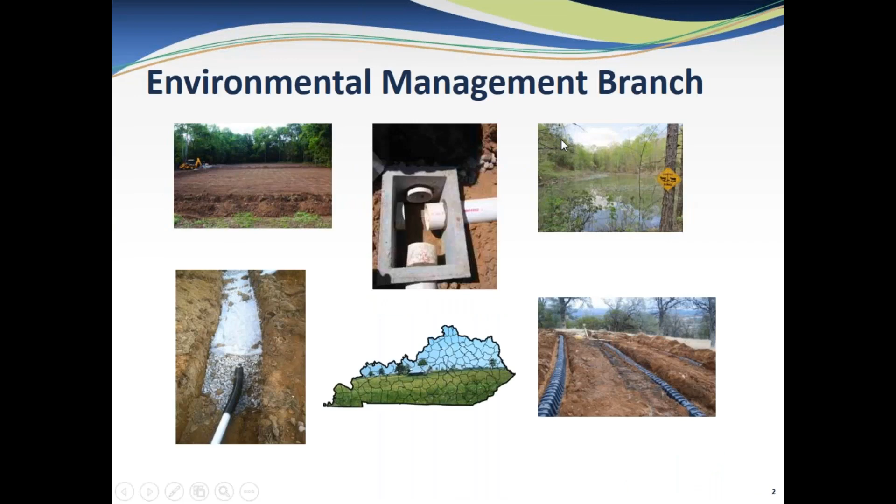I'm just going to go over some installer information. The present year started April 1st, 2018, and it'll end March 31st, 2019. Installers must receive their 6 CEUs by the end of March 31st, 2019 to remain certified. If they don't receive their training by then, they will become expired, effective April 1st, 2019.

For expired installers, they're expired for lack of maintenance training. They must obtain the 6 hours to get recertified, and then the 6 hours to get caught up for the year to be in good standing. Installers are never allowed to take the initial tests over again, and they're never deleted from the system unless they have passed away.

This is just the MOA, the updated, most recent one, and it just has the cabinet responsibilities and the health department responsibilities. And then our most recent installer certificate for the installer classes.

Our newest sign-in sheet also has my email address and my fax number as well. And these are the installer cards with the new commissioner, Dr. Howard. It'll have their name, their certificate or certification number, the expiration date, and the health department they're certified through. On the back of the cards, they have the number as well.

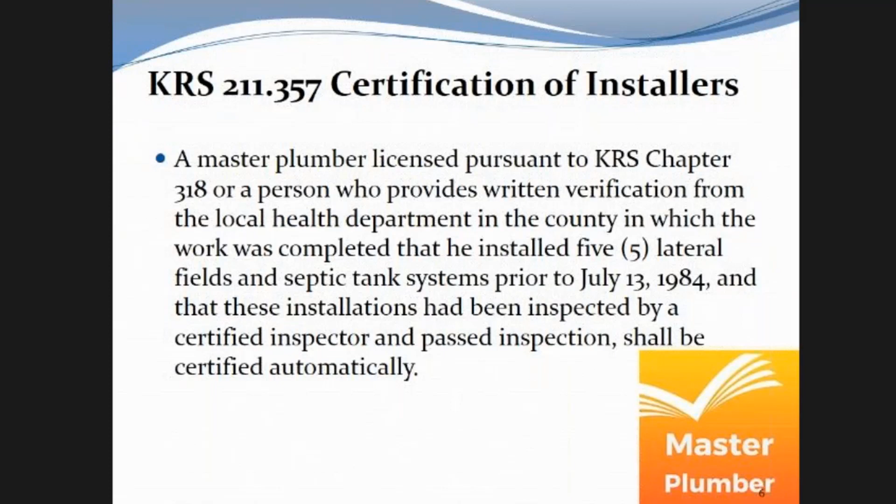The one good thing is once they are certified, they do have to do the annual training, so they're going to get training. I know it's after the fact, but the law says they don't have to take the test to become the installer. We can't change that—somebody would have to lobby a legislator to change that. Kenny, you'd probably be a good one to do that. No, I'm too old. Okay.

Let's see, I'm not sure, 5 systems. Yeah, once the cabinet's made aware of their 5 completed systems, then they get their full certification within 60 days. Again, the cabinet has to know that they've done it—nobody's a mind reader.

Violations—some of your installers, especially your newer ones, need to be aware of these violations that could trigger administrative action on them. This isn't being presented to threaten them in any way, we just want them to know these things can happen, and some of them are a 'shall happen,' not a 'could happen.' This is a may revoke or suspend.

Well, that's not helpful. If they violate the provisions of the chapter or the regs, that's any of them. If they practice fraud or deception to become a certified installer. If they're just plain incompetent to install an on-site sewage system. I don't know how you would define that, but I guess you know it when you see it.

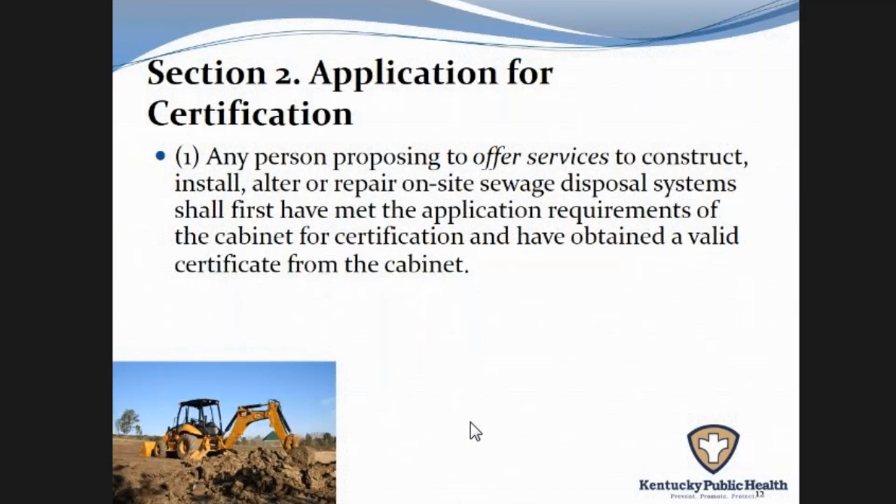So the application for the certification—if they want to become the installer, they have to fill out the application. Even the certified plumbers need to fill out the application. It gives the information as far as the DFS form 233, and the definitions of the different levels as they currently are. Again, this is from KRS.

Going over what the expectations are for that minimal, for the probationary level or minimal knowledge. This is an important one—I don't know if it's applied equally across the state, but hopefully as you all get applicants, each year when they get their certification, they have to show proof of liability insurance.

This is important that your installers are aware of this—they need to carry that, they have to maintain it each year, and provide the proof to the health departments when they're renewed each year, and that it's required for all installers. This would also be required once a certified plumber becomes an installer—they would have to show proof of liability insurance.

Then the full level of certification—again, this is after they've completed their 5 systems, been approved without any problems. Certification is not transferable; it's only valid for the individual person.

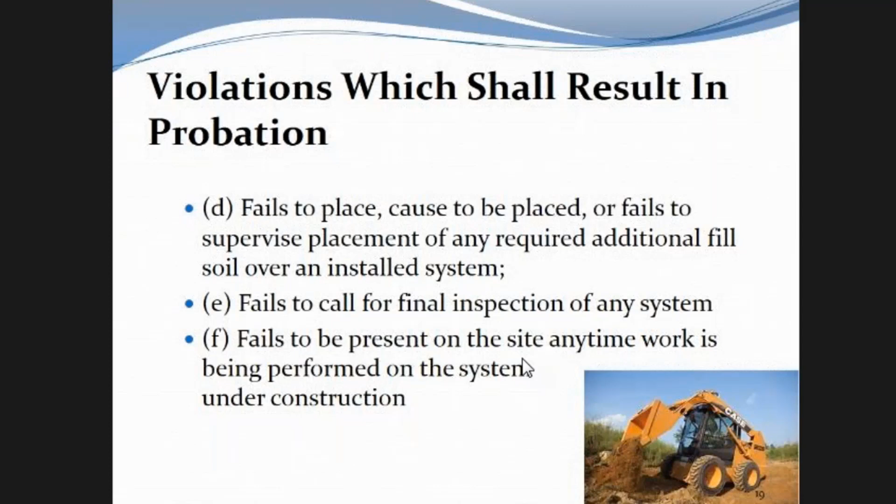So it's important they realize these possible penalties. Hopefully that would prevent this from ever happening.

Who can assign the probation? It can be assigned to a certified installer by the cabinet or the certified inspector having local jurisdiction, of course.

It's important whenever probation is issued on an installer that any stipulations as part of that probation are put in writing, so it's all very clear. There's nothing that's going to happen later that wasn't expected.

And the health department can put stipulations on the probation. It's not just you're on probation for this amount of time—you can add stipulations.

For other violations, the normal procedure would go into place as far as suspension, revocation, and just again, for your information, before those type of proceedings happen, you should have an in-house sit down with the installer and document what was discussed and what decision was agreed upon, if one could be agreed upon, before actually going down the road of doing a real conference.

You need to have an in-house meeting. You want to try and resolve it locally as best as possible.

Whenever you do any type of administrative action, probation or otherwise, the installer has the right to request an administrative hearing. So whenever you issue the notice of probation, so on and so forth, you need to give them the request for hearing at that time, so if they want to dispute it, they know how to go about that.

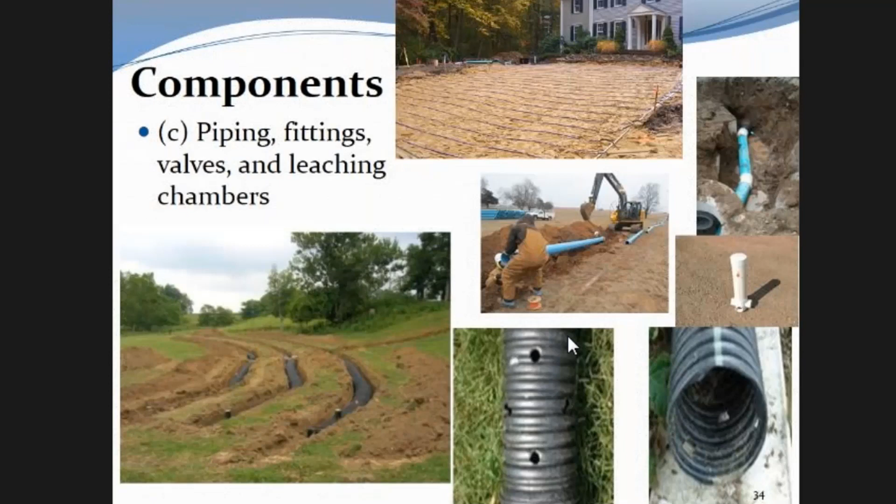And instead of doing the Jeopardy this year, I'm sure all of y'all will miss that. This will be the next fun thing for your installers to jump into.

Distribution with varying length laterals. What type of distribution can you use varying length laterals with? Hopefully your installers will know this.

Installer must maintain to pull a permit.

There you go. This ain't gonna be done all at once. This will pop up throughout the presentation, so a little respite for your installers. Depending on how much time you spent with your installers, you can take a break with them. We're not doing that today, of course.

Pipings, fittings, and connectors—again, this is still talking about your components, your non-perforated pipe, gravity flow usage. This is going to basically talk about what is allowed, what type of non-perforated pipe they're allowed to use. If you've had issues with installers bringing in some of the thin-walled flexible pipe, this is a good time to talk to them about it.

Just go over how just because somebody at Lowe's says, yeah, I'll sell you this, that doesn't mean they can use it. I know that's happened in the past. It talks about the different SDRs and ASTM qualifications for the pipe.

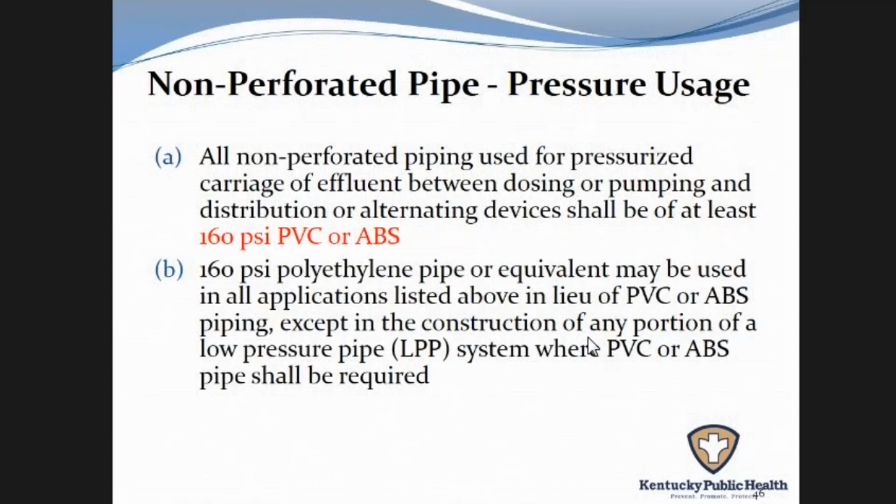So what type of pipe and when to use it? Your installers might chime in on other ideas they have about different types of stronger pipe that work better in certain situations, such as going under a driveway, to carry effluent from the tank to the D-box. You might remind them if they're doing gravel beds or laterals that the solid pipe needs to go in about 2 feet into the rock lateral before starting the perforated pipe, to get that effluent into the lateral line. This is a good time to talk to them about that.

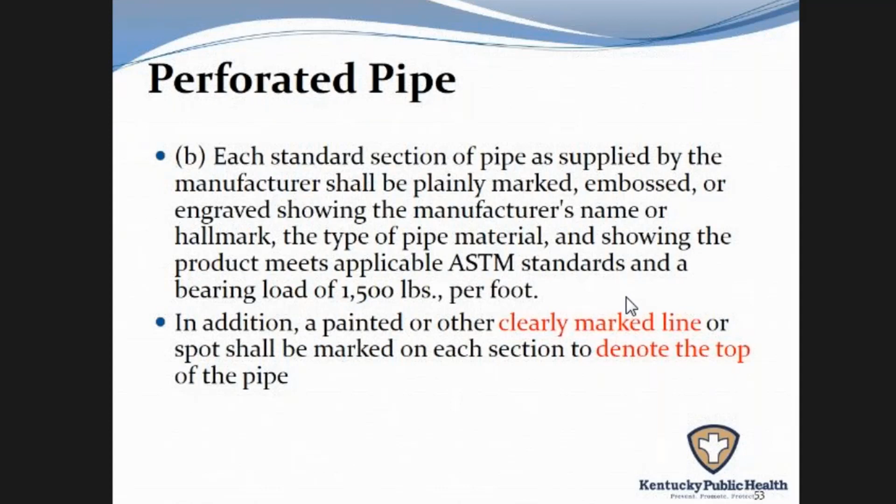And the super crush - you can go over the perforated pipe with them. Of course it's a different quality of pipe, not as thick or as rigid. Talking about how it has to be marked, and it has to have the line on the perforated pipe so everybody knows which way to turn it, so the holes are in the right direction.

They can actually use, for perforated pipe, a minimum diameter of 2 inches. I've never seen it done, but they can. It's 4 inches for 25-plus years - it's 4 inches, but the reg says it can be a minimum of 2.

And then it gives the standard for hole placement for 2 and 3 inch diameter perforated pipe - same sizing, same system sizing. The lateral line sizing would still be the same for gravity use in a rock system, just instead of 4-inch perforated pipe you could have 2 or 3 inch.

I've never seen it used - it's not common on the market, but here are the regs if somebody needed to know. This lets them know the minimum hole size and how the holes will be placed on that smaller diameter pipe. If you ever see that type of pipe and you're not sure, you can always call one of us, call the Frankfort office, or look in the regs.

And then the 4-inch pipe, which I think is what we're all used to. Do you think that maybe that's referring to a low pressure system or something like that? It could, but this is gravity usage. Yeah, the pressure usage, even in the lines, is a stronger pipe.

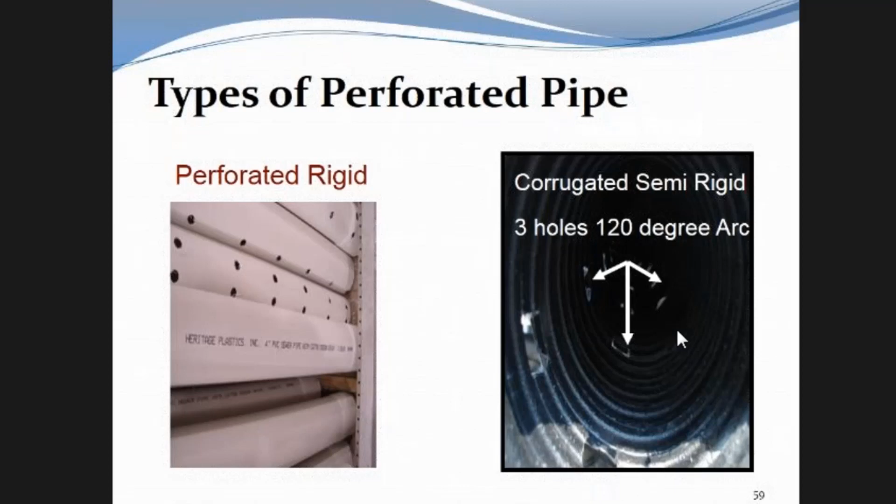So some items that were the components in the on-site regs themselves, some things that affect installers. Hopefully y'all aren't having too many issues with this, but one of the big ones that we still see in areas is the system drawing to get a permit. So you can talk to them about that. The permit's only supposed to be issued to a certified installer. They're not supposed to be sending in homeowners and whoever else. It's supposed to be the certified installer. Damaged tanks will be talked about, the risers we talked about, system inspection requirements we talked about, the installer's affidavit, and the cover soil.

So these are things that are going into here. If there's other items in the regs that you need to talk to your installers about, obviously this is your chance to do it while you're having your class. You don't have to only talk about these if there's something else you need to discuss with your installers.

So the proposed system drawing, this talks about why it's required and what is required. That last bullet is pretty straightforward. Application for a permit to install, when it's submitted, it has to be accompanied by a detailed drawing of the proposed system or alteration, including all necessary specs and the required permit fees. So if your installers want to kick back on that, you can show them this is the regulations, and this is why you're required and held to that standard.

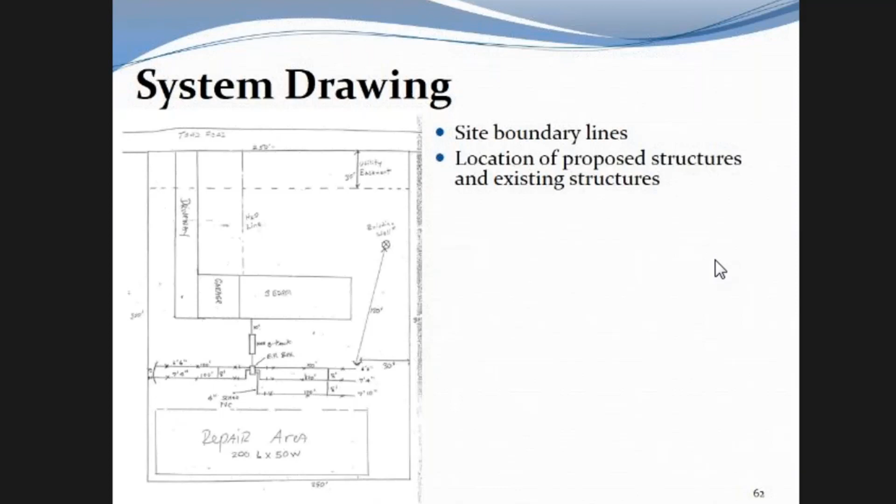It's a good time to work with your installers on that. Site boundary lines are to be shown, location of proposed structures, existing structures, the location of any items on the property that require setbacks, and of course the sewage disposal system, zoomed in tight. Grade shots of all the components, size of the septic tank, type of D-box, type of laterals, and the footage - length and width of your lateral lines, and the setback distances.

Permit is to be issued only to the installer. Again, this is by regulation, 902 KAR 10:110. Or a homeowner, as provided, and it expires one year after the date of issuance. Unless you can always grant an extension if it's warranted.

Component installation standards. Again, if y'all are having issues within your area and you need to talk to your installers about how they're getting their permits, what they're submitting for their permits, definitely it's time to do it. Septic tanks, other pre-treatment units, dosing tanks, holding tanks - they are to be installed level. The connections are to be watertight. The manufacturer instructions are to be followed, especially for the electrical connections.

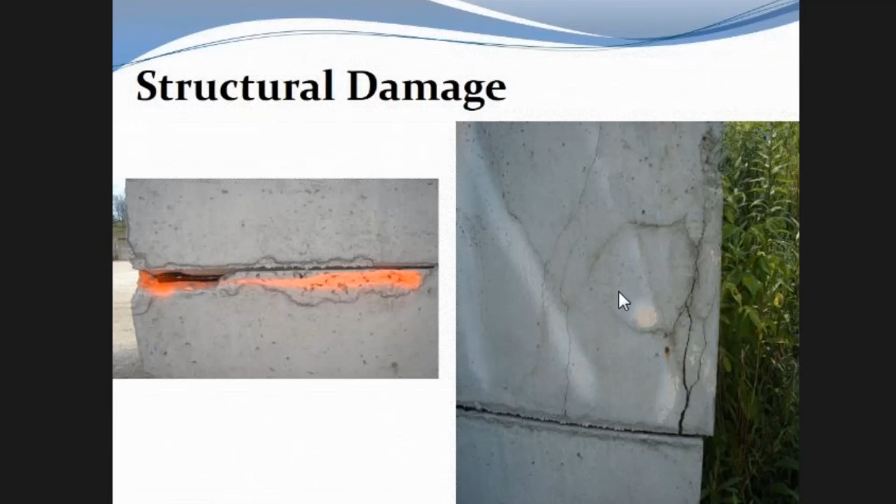Risers, hopefully all your installers have gotten used to having to do the risers. One thing to reiterate to them is the septic tank manhole lid has to be in place, and then the riser lid — it's a two lid requirement with the risers. The riser lid has to be tamper resistant. Lids or covers, precast concrete, cast iron, steel have to be 60 pounds or more and require vertical lift. They can't be a slide-off type of lid on a concrete riser — it has to have the lip, it has to be lifted vertically.

If you all see problems with components, you can talk to your installers about that, and any problems you see with components, get hold of one of us so we can go work with the manufacturers to hopefully get them corrected. And if installers are having continuous problems with the manufacturer, they can let you know, and then you can work with us, and we'll get out there and work with the manufacturers.

Lids or covers made of sheet metal, plastic, or fiberglass have to be attached by bolts or other suitable fasteners.

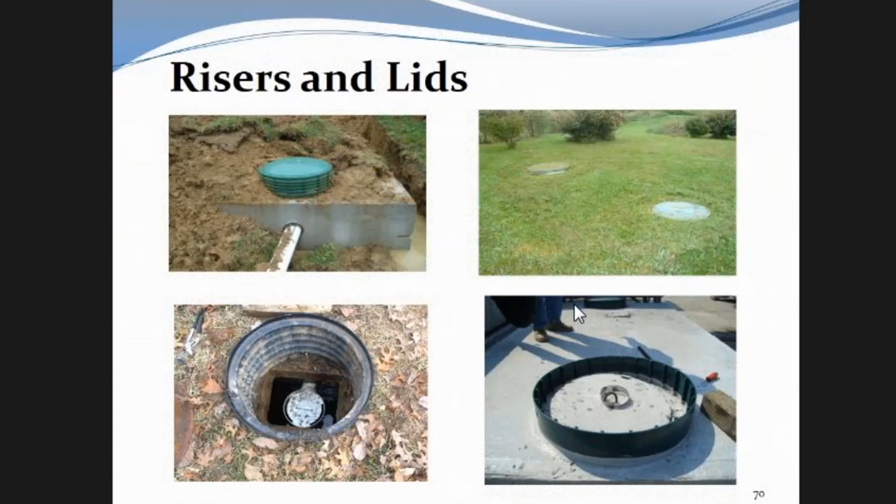This is talking about the installer's affidavit. The installers are required to submit an installer's affidavit for every system when you go out there to do the inspection. And on that, they have to record all their grade shots for their excavation work. Basically, they're checking their work before you get there to check their work. They're supposed to shoot their grades before they put in the chambers, the rock, et cetera.

Do they have to shoot the repair area? Is that required? No, no, this is for the excavation itself. So in the repair area, there's no excavating being done yet. This is when they come in to pull the permit. Would they have to lay out a system, lay out the repair area?

It's not required by our regs, no. If you are in an area, you all, Northern Kentucky Independent, Fayette County Independent, Jefferson County Independent, you all can make requirements more stringent than our regs, but no less stringent. So if y'all are requiring that, that's your all's requirement. And if that is one of your all's requirements, obviously class is a great time to point that out. That's up to you all. If you're in Fayette, Jefferson, or Northern Kentucky, and you do make more stringent requirements, you're supposed to have it approved by your board and put in writing. So just be careful how you do that, that way you don't get in trouble potentially for going cowboy on people.

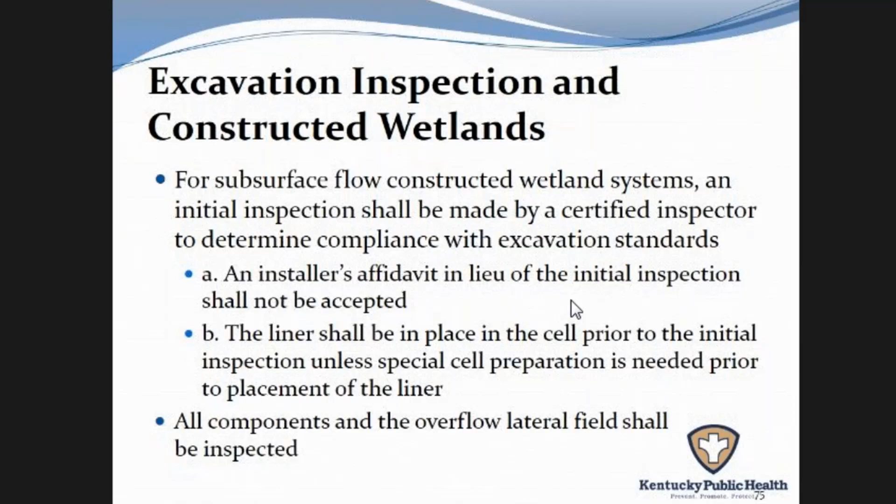Now the overflow lateral lines for the wetland cell - they could do an installer's affidavit, or you could go ahead and do the excavation inspection while you're out there doing the wetland cell, however you want to work that.

The top half of the inspection form is the excavation inspection, and noted on the right side of that, to be performed on all constructed wetland systems. And these are actually required on homeowner installations - the thing that we all love, homeowner installations. You got to hold their hand the whole way through, which includes doing an excavation inspection, not an installer's affidavit, for a homeowner.

Not that the installers really need that info, but it's good to know. Hey Craig - yep, it's an odd thing. We don't really allow homeowners to do their own systems unless they take the test, whatever. But I had a guy who was a master plumber.

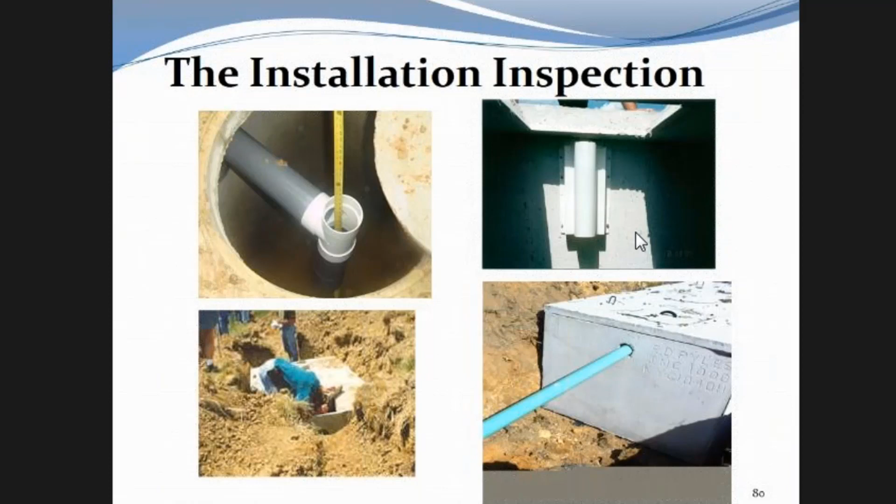The water leveling - hopefully you're not having any problems with installers. They are to provide the water, even if they're not there, they're supposed to provide you water, leaving you a 5-gallon bucket, whatever, but they're supposed to provide that for you. Testing of the dosing devices, low pressure systems and alarms. Shooting of trench bed, constructed wetland cell, lagoon bottom, examine the installation of all your lateral lines, perform other necessary examinations. Whatever issues you might be having with installers, or things you want to reinforce with them for your inspections, this is a good time to do it, so everybody's on the same page when you show up to do your inspections.

Showing some photos of some basic processes that take place. Top left showing grade shots being done through a port going down to the bottom of the trench. The chambers - you can shoot them either on the top of the chamber or alongside the chamber since they're consistently the same height.

Lagoon fencing - some areas don't hardly have any lagoons, other areas have a lot of lagoons, so it depends on your area how much you'll need to address this. The fencing is the installer's responsibility. You can reiterate to them, even if they have some agreement with the homeowner, it all comes back to the installer, whoever holds the permit. If something's wrong with that fence, it's coming back to them as far as your inspection goes. You can talk to them about the type of fencing that's allowed, the height, and so forth.

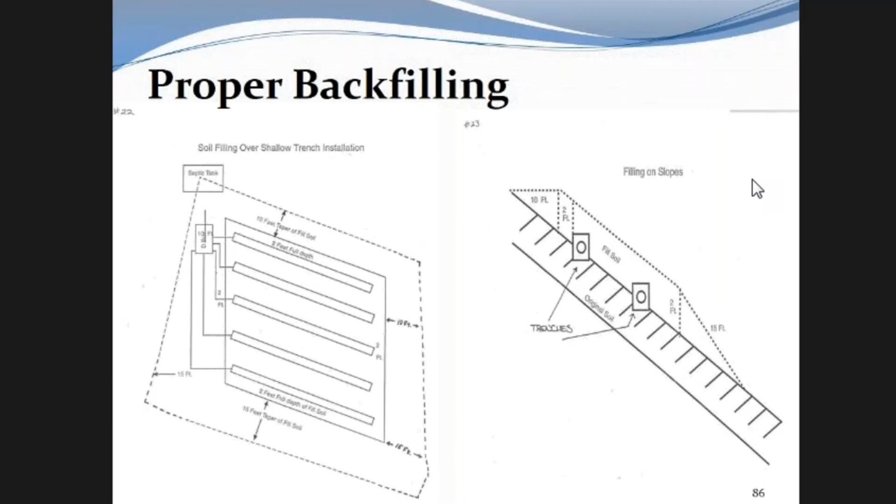Here's a new drawing - not really, it's about 25 plus years old - just showing how the cover soil needs to be placed over and around, then tapered out upslope off the ends and downslope. If your installers haven't seen this before, then they must be brand new. This can be an issue when an installer subcontracts out the backfilling or placing cover soil over a system, and deals with homeowners for adding the cover soil. Again, the installer is ultimately responsible. Inspectors aren't to give final approval until all the cover soil issues are completed.

Some prohibited practices from 10085: cutting, filling, or otherwise altering the original grade. Basically the area where the system is supposed to go, they're not supposed to go in there and mess with it. Or if they get there and it's obviously been cut - maybe a builder has come in there and changed things around - then the installer should stop and call you, the inspector, before putting the system in. That has happened in a big way in some areas in the past. Hopefully you can have a good working relationship with your installers, but let them know that if they see something that looks out of the ordinary, they need to stop and call you.

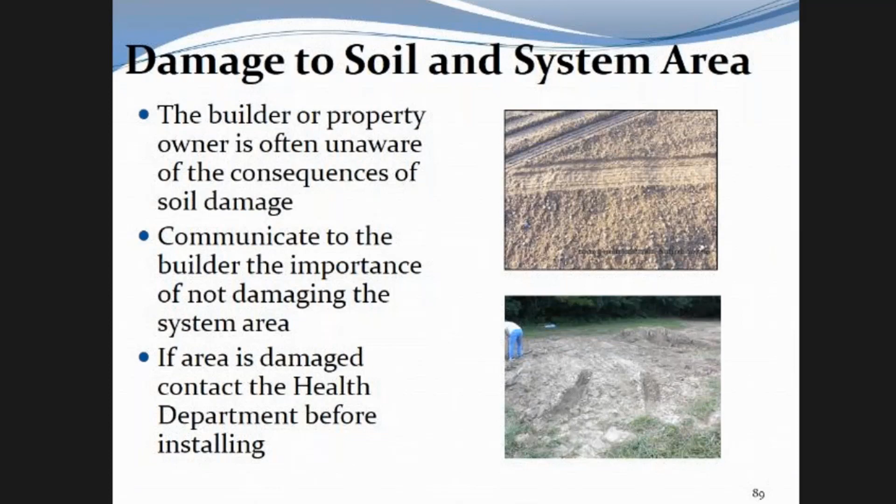That's just showing some examples, an area driven over at top right, and just showing different stockpiling of materials around a construction area.

Contracts, of course, this is not in regs. This is merely information to share with installers. The use of contracts can be a benefit as far as clearly defining what's expected of an installer and from the homeowner's point of view, and hopefully help them stay out of problems with unhappy homeowners. It goes through some of the benefits. You can talk to them about that.

Benefits to the homeowner, it's a two-way street. Contracts can protect both parties if they're used. I don't know what it's like in your all's area, but it seems like wherever I go, I never see a contract in place. It's just people mad at each other because they said they didn't do this, they said they'd do that. I'm sure installers have been in those situations. If they get a written contract with the homeowner, it could keep a lot of problems from ever happening. Or at least they'd have something to fall back on and not just verbal stuff.

Hopefully, as installers move forward with modern times, maybe they'll actually start using contracts. Everybody else does when they do work, it seems like.

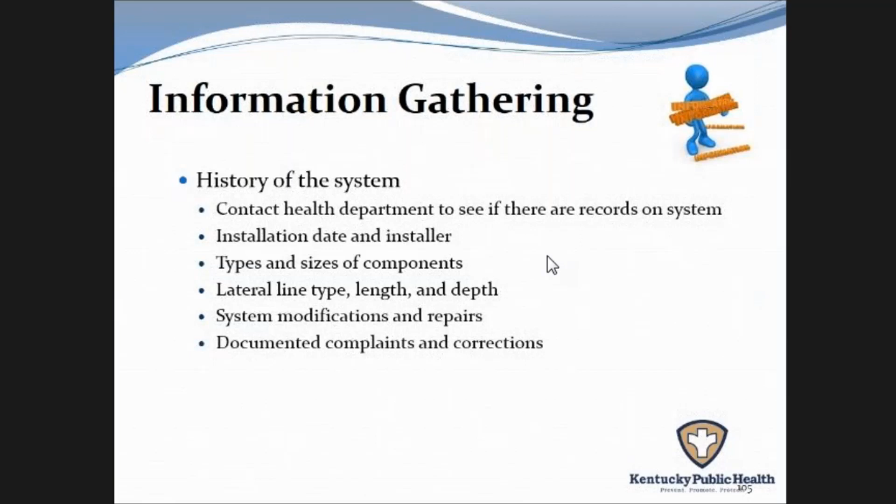That last bullet, documented complaints and corrections, it doesn't even have to be documented. If the property owner or a neighbor can provide information on how long a problem's been occurring, that can be helpful.

Routine servicing records, if they've ever had their tank pumped out. The water usage, that can be one of the first things to get, if possible, either through the property owner or if you have a good working relationship with your water companies, if they can provide the last year's water use.

A lot of times when troubleshooting systems, it's not necessarily about pinpointing the problem. It's as much about eliminating things that might be the problem. So if you get the water use, it can help you eliminate that as being one of the potential problems.

The waste composition, what's going into that system, make sure they aren't putting their air conditioning condensation drip line or their water softener, so on and so forth, their downspouts. How many occupants are there, which goes into water usage.

Any other property owner information as far as the malfunction or damage, how long has it been happening, where is it happening, is it all the time, is it just part of the year, so on and so forth. Talk to them about the whole process of a system over time having problems, filling up.

The septic tank, they're going to have to find it if it can't be found, although with the risers anymore, that helps. Property owner or installer can uncover the inlet and outlet manholes. Any work being done around the system should be done by an installer or homeowner. It's not recommended that inspectors do it.

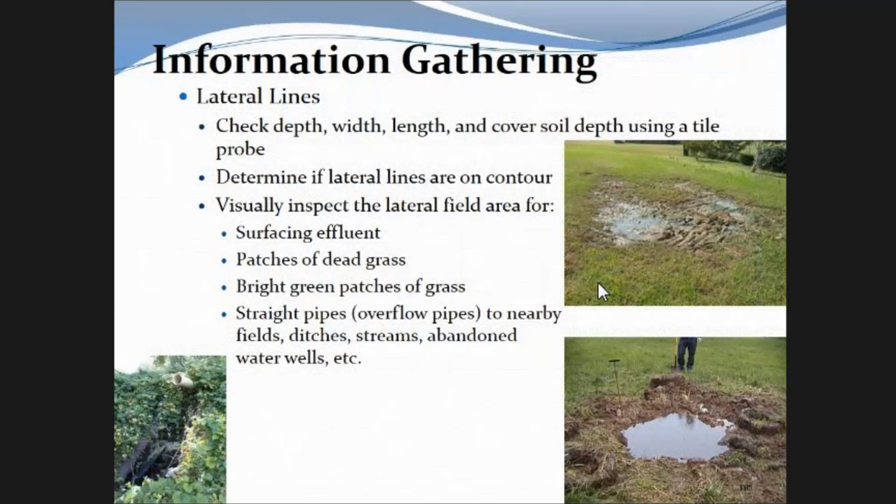Another thing an inspector can do with the installers, once you locate the lateral lines and see what depth they're at, you could drop a few auger holes in between the laterals, not near the laterals—you don't want to create a gusher—and see what the soil conditions are where those lines are. If it's an old system, they might be down deep in some bad soil.

Lateral lines, rock laterals: probe into the rock to see if lines are saturated or dry. On some old systems, I've seen homeowners convinced they need a new system go out and probe. You find a few lines that are bone dry and come to find out it was a disconnected or broken pipe further back in the system, and they don't need a new system.

May need to probe throughout the length of the individual lateral lines, to see if water's even getting out to the far reaches of the lateral lines.

Leaching chambers, might have to try and probe next to the chambers to see if the lines are wet or dry. Of course it's harder with chambers as far as probing to see if they're taking water, since you can't probe right down into them like you can a rock system. You can try and probe next to them. If an installer is going to be there to work with you, they might very carefully dig right next to a chamber, but of course that has to be done very carefully.

What's that top picture showing? Top right, a bunch of gunk coming out of a leaching chamber. I'd say somebody put a whole lot of something through the tank that should never have been there. Or there was no baffle. Who knows? That's just a mess right there.

Is there some good information being shared back there? We need it. Okay.

That's just a mess, what that is. That is nasty. It looks like everything in the tank came out to that line.

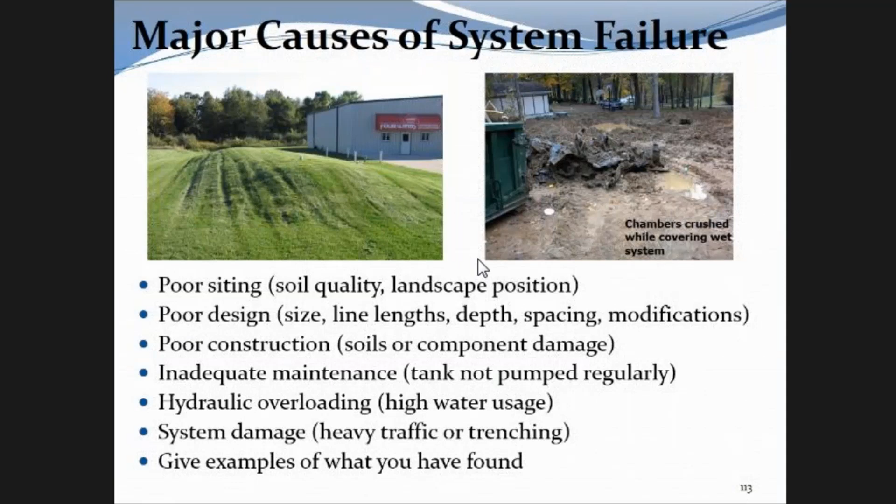Types of failures: there's above ground, and the one we pretty much never really know about, below ground. Not sure if that's a failure or not if it's below ground, unless it comes out somewhere, and then you're going to have to do a dye trace to really determine if it's a true failure or not.

An occasional failure is usually related to wet weather or variable water usage. A continuous failure is always there. So if effluent is surfacing, you can have a single point line surfacing, and here's some of the reasons it might be doing that: uneven distribution.

That's not overly unusual, especially within a few years of a system going in, through frost heave or whatever. An equal flow box can get thrown off. Speed levelers pop off for whatever reason - go back in and readjust them. Trenches not being level can be a problem, hopefully caught between the installer's affidavit or excavation inspection and the final inspection. But if that is the case, it might end up needing a new trench and abandoning the old trench.

If the system is full, effluent ends up surfacing at the lowest line in a hillside system, or in an equal flow system at the line with the least amount of cover soil or the least permeable line, or it might pop up all over the place. In equal flow systems, just putting soil over a wet spot isn't necessarily going to fix the system - that's going to have a problem if it's already full. A lot of time that's like playing whack-a-mole - it's just going to pop up somewhere else, and you're just chasing it around, slapping Band-Aids on a cut artery.

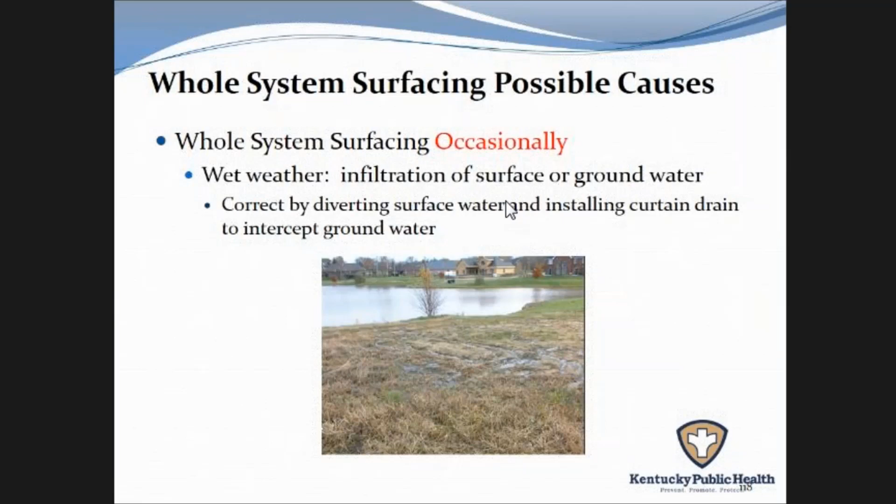The whole system surfacing occasionally would be due to wet weather, infiltration of surface or groundwater, and this is where diverting water, either on the surface or through a curtain drain, can help a lot. During dry weather, if you have intermittent excessive water usage, then they need to go in and check their plumbing, limit their laundry use.

Excessive water usage daily, they're going to have to make a decision. They're going to have to decrease their water or increase the system size. There's only so much you can do. If there's an inaccurate soil evaluation, have it reevaluated, put in a new system, or add on to the existing system.

Improper installation of system, lack of proper maintenance, system size was inadequate. That might fall into one of these categories where somebody applied for a 3-bedroom system, but they actually put in a 5-bedroom home, and all the bedrooms are being occupied, which you probably see that through water usage anyway, in which case the system size was inadequate from the get-go.

Again, the installers can give you a lot of backstory information when they start talking about this stuff.

Might have damaged components, tank outlet baffle or tee. That middle bullet, infiltration of spring water, I know that gets talked about in a lot of places, but I'll be honest, it seems like that's very rarely ever truly what's causing the system to fail, but it is possible. It's a unicorn. Yeah, it's kind of the unicorn of failing system problems.

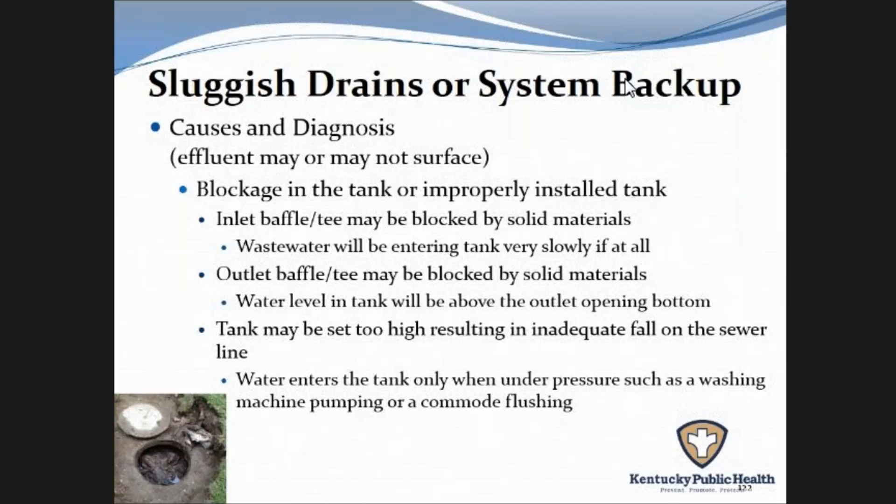You can go through each of these items and talk to them with your installer. That last bullet, it happens.

The tank can be installed backwards without realizing it. Some of these manufacturers, unfortunately, in today's world, can't hire the best quality of helpers. Sometimes the number, the code, if it's painted on, gets painted on the wrong end of the tank. It's painted on the inlet end. And the tank gets delivered. Whoever delivered the tank assumes the number's on the outlet end. They set the tank, and the tank's now backwards. So it does happen.

Well, it's easily fixed. It was a two-piece tank, so we only had a half of it to reseal it. Okay.

Again, blockage or damage, sewer line pipe. Your installers, they can talk more about this. Some of them I know are using the little cameras to go run through the lines. They can check for blockage doing that. But anyway, you can talk to them about the sluggish drain issues.

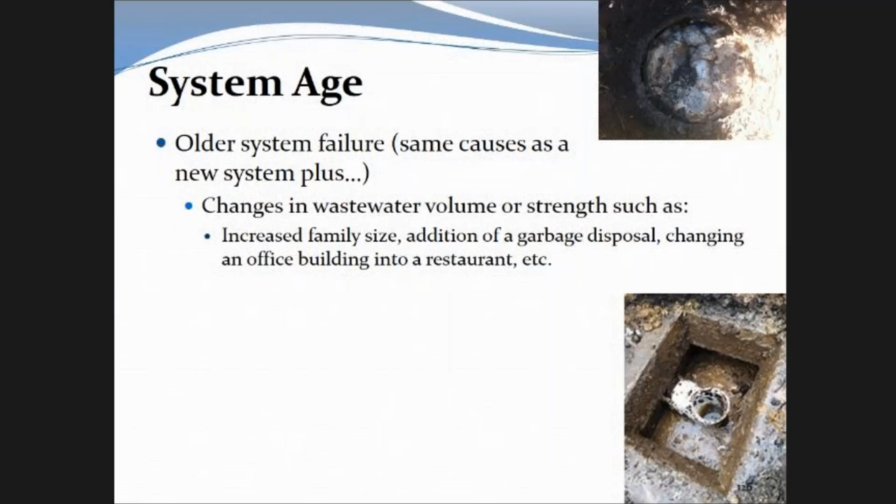Older system failure. It could be a change in the wastewater volume or the strength. They change family size, added a garbage disposal. They change the use of the facility. They don't maintain the system.

Additional information, the average waste load. Again, this goes back to water usage. Those water use records can be invaluable. The type of water composition, human waste only.

The installers know this stuff. You all know this stuff, but this is information they can share with homeowners, especially those darn wipes that say septic safe. None of them are. None of them.

Again, things they can talk to homeowners about not putting into systems. This is a good one - installers love to chime in on this part and say, yeah, they shouldn't be using powdered detergent, or this type of detergent is horrible, this bleach is terrible. They like to share what they seem to know, which can be good.

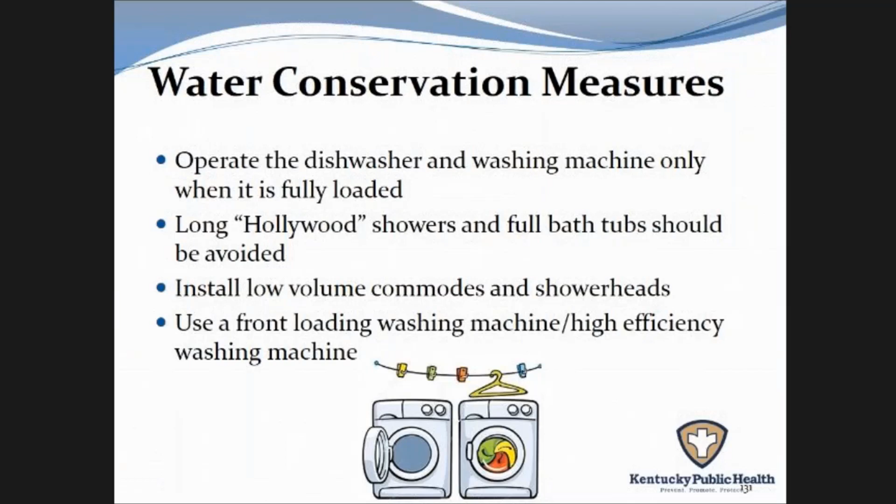Environmental measures. Installers don't like to have to do any more work than they have to. However, diverting all surface water away from the system can be very helpful - downspouts, sump pump discharge, so on and so forth.

Again, structures, driveways, pavement - never put over the laterals. Pools. Separating gray water or just the laundry water.

So with the new gray water separation, that can be useful for repairing systems. In years past, I think we've all looked at separating gray water off systems that were having problems. Well, now you can also look at separating gray water off altogether. Installers probably aren't real familiar with this yet, so this is a good time to go back over this to help reiterate how this can be done.

Sounds like in some areas of the state, gray water separation has been done a fair amount, but as a whole, I don't think it's really being done much throughout the state. But it is possible. A permit does have to be obtained. It's new as of 2017. Design and installation requirements are new.

I'm not going to read all this stuff, but definitely review all this material before going over it with your installers so you can provide the information they need.

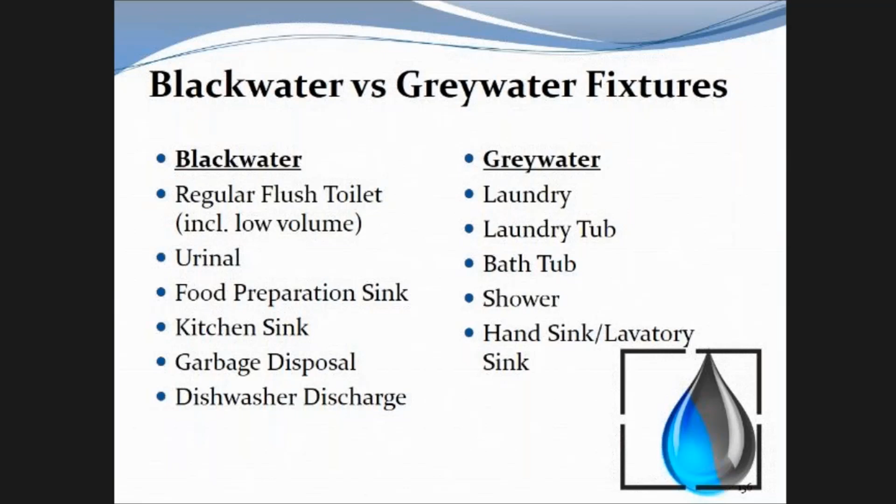This goes through a few sizing examples for your total daily waste flow in the gray water. This can help your installers understand where the sizing is coming from. This is just a straightforward sizing right here, just standard flush toilets, nothing else being done, where the TDW comes from. Then if they do a composting toilet, but nothing else different is done, then you're using the 83 gallon per bedroom for the primary system.

And then if they do regular toilets, but do separate the gray water, then the primary system is sized at the 83 and the gray water is sized at 55. If composting and gray water are done, then the primary system is sized at 55, and the gray water is also sized at 55. That's per bedroom.

Again, it'd be good to review all that before talking to your installers about it. If y'all ever have any questions about this before you present it, feel free to touch base with us.

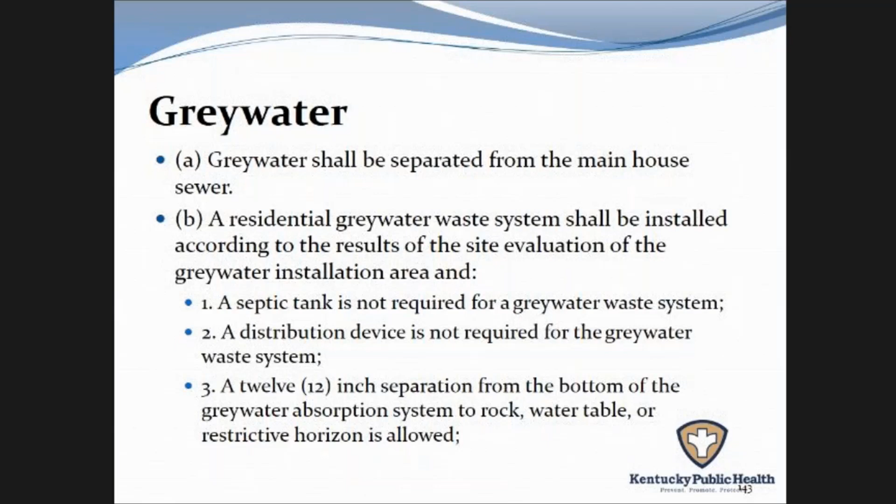Cover over this gray water area just has to be done in a way that prevents ponding or surfacing of gray water. A valve is being installed to divert the gray water back to the primary system in case there's ever a problem with the gray water area, so they could send it back to the other part of the system while they fix the gray water area. There has to be a 100% repair area for the gray water area, separate from the primary system repair area. And the gray water area still has to meet setbacks.

Talking about the type of wastewater the gray water area is designed for: bathing, showering, clothes laundry, laundry sinks. It is not to contain the following, and it cannot be applied directly to the surface of the ground or above grade. It has to be below final grade.

The sizing of the absorption area for a gray water area is based on 55 gallons per bedroom per day and the application rate in table 3. We'll go through a few sizing calculations here in just a minute. If you're only doing laundry gray water, it's still done the same as the old way, 15% of the TDW, but now it uses the application rate, not linear feet per gallon. I'll show an example here in just a minute.

Don't you think it's setting the gray water system up to fail without using a tank? Not necessarily, no. In fact, going into being told to do this by the legislature, we looked at a lot of states, mostly out west, who had done this. And what we found over and over is they said, do not send gray water into any holding vessel that's going to hold it for more than 24 hours, because the gray water, when it's first generated out of the home, it's not septic, it's just dirty water. But if you hold it in any vessel, tank, whatever, for more than 24 hours, it's going to go septic and it's going to get worse. The sooner you can get it out to the soil, actually, the better for gray water. So that's why no tank was required.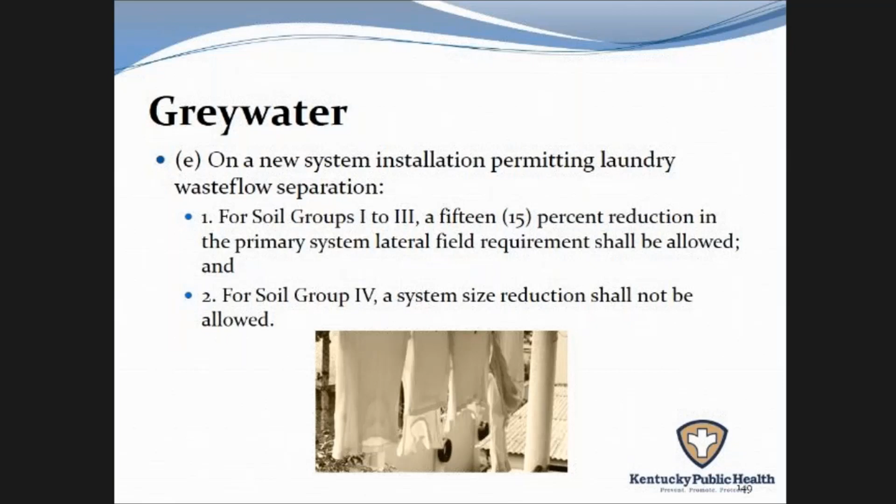Gray water on a new system installation, permitting laundry waste flow separation. Again, soils group, same as it's always been. Soils group 1 through 3, you can give the 15% reduction off the primary system. If it's a group 4 primary system, they get no reduction.

Again, gray water is sized at 55 gallons a day per bedroom, and then use the application rate to size the gray water system. We're all used to doing the linear feet per gallon, which is the second column of our soils chart. The application rate is actually the first column of our soils chart. And we'll give some examples.

So for a 3-bedroom gray water system in group 3 soil, you have 3 bedrooms, the 55 gallon per day for the gray water system gives us 165 gallon per day. For the group 3 PS soil, the application rate is 0.37 gallons per square foot. So 165 divided by 0.37, they need a 446 square foot soil absorption area for the gray water system.

So the absorption area is the bottom of the trench or bed area, not the sidewalls. So they need a total of 446 square feet. It could be 10 foot by 45 foot, or it could be 2 foot by however long that would be. Just the total amount. So however long that length by width is of the bottom of the trench or bed, that would be your soil absorption area.

And again, you still have to account for the black water system usage over in the primary system. There's an example of our good old alternating valve that we've all seen for years. That's not the only type they can use, but that is a type.

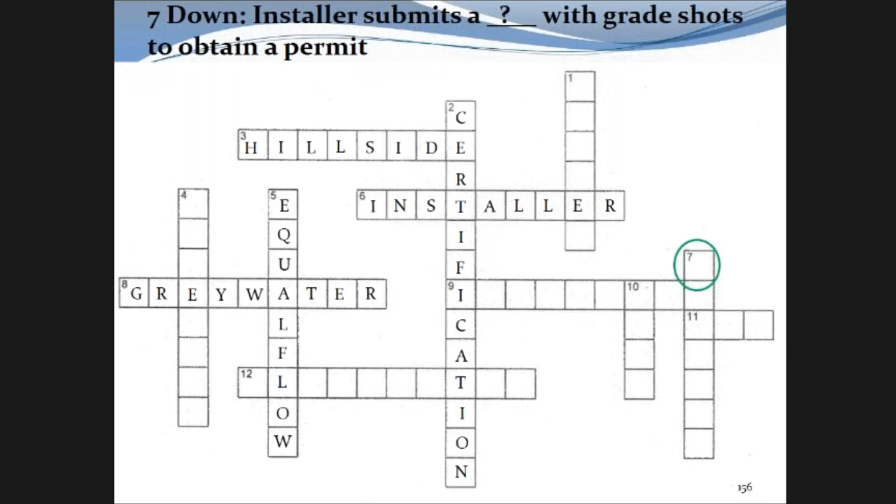Installer submits a what with grade shots to obtain a permit? A drawing. A what? A bribe, yeah. An envelope. Person that performs the site evaluation and issues the permit - well, I hope so, it's the inspector.

Installed on tank outlet to remove additional fines. Some of the topics we're going to touch on for on-site options: septic tank and effluent filter options, dosing tank options, aerobic treatment unit options, constructed wetland option, trench barrier material, distribution options. Again, this is a variety of topics. When y'all are working with your installers in these classes, add on whatever topics are more pertinent to your area. If there's an issue you've been having in your area, this is a good time to talk to them about it.

Septic tank effluent filter options. If I can get this to click - there we go. So the pre-treatment options, this is going to touch on when they use what size and types of tanks. Some installers still wonder why they need to use a 2-compartment tank or a tank with a filter and so on and so forth.

Of course, the used septic tank itself removes the bulk solids from the wastewater. It's the primary treatment, keeps the solids from going out to the lateral field. And here's what happens if it's not used, or if a baffle is not in place when it's installed.

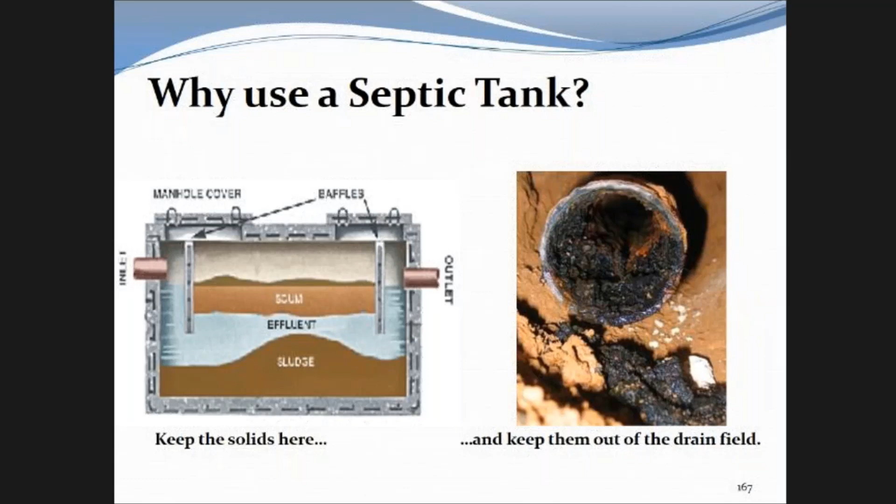I'm not going to read all that. How does it do all that? Need at least 24-hour retention time, which is why it's sized up. Allows solids to settle, anaerobic breakdown.

I think your installers are fully aware of all this information - at least I hope they are. If you have newer installers in your area, this will probably be good for them, or that plumber that just became an installer.

And over time, this is just showing how the sludge scum layers build up to the point that material starts moving out to the system.

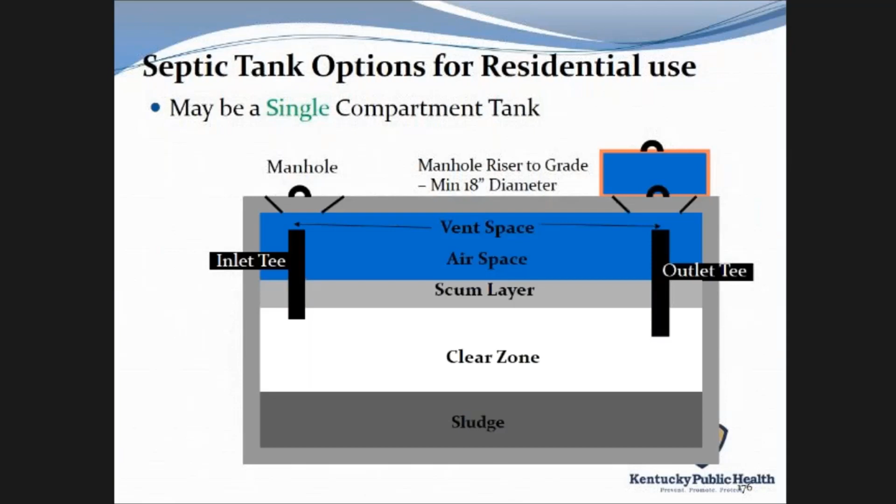When to use a single compartment: if it's sized for group 1, 2, or 3 soil, if an 18-inch separation is maintained. A 12-inch separation is now allowed regardless of depth to restrictive horizon, rock, or water table, but if they do less than an 18-inch separation, they have to upgrade the tank. So a single compartment can still be used, but only if an 18-inch separation is maintained.

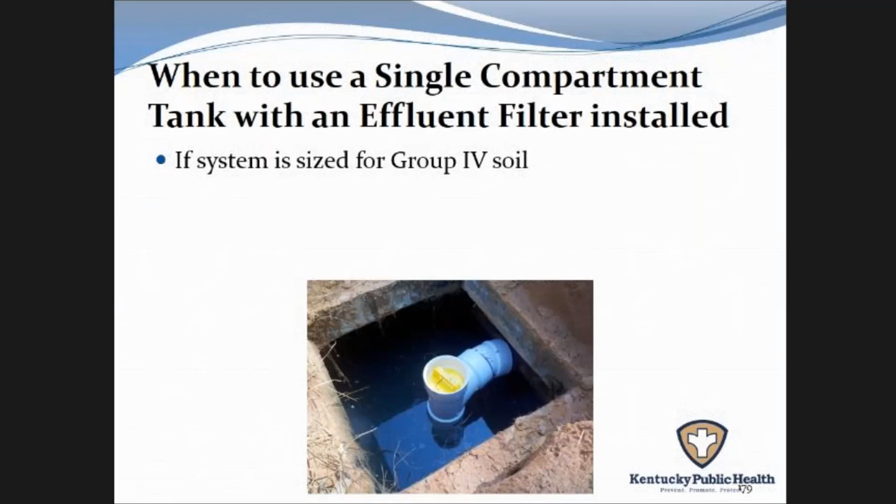When to use a single compartment with an effluent filter: when there's group 4 soil, clay soil, or if an 18-inch separation is not maintained, upgrade the tank.

When to use a 2-compartment tank: they can use it if the system is sized for group 4 soil and if an 18-inch separation is not maintained. They have the option of either the filter or the 2-compartment.

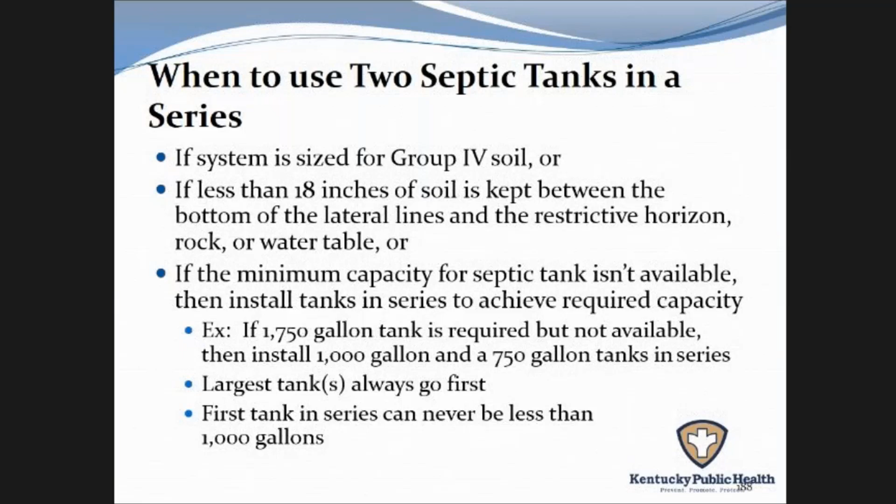Haven't seen it come up that way very often. Well, I do that quite a bit. We always do the 1,500s and the 1,000, but I haven't flip-flopped now.

When to use two tanks in series with a filter? Kind of falls in the same line. If you have a constructed wetland, the effluent filter must be the large commercial size filter.

What if they're using plastic and fiberglass tanks? Again, some of this can go back to this whole riser issue with your plastic and fiberglass tanks. They can be helpful for hard to reach sites. They don't have seams that have to be sealed. They are lightweight, but they do have very specific installation instructions.

I'm sure some of your older installers will probably want to chime in on how plastic tanks are awful, that they warp when you backfill them, so on and so forth. But it is a good opportunity to talk about how a lot of the newer tanks are a lot better than they were 25 years ago.

A lot of the newer plastic tanks can be very helpful for hard to reach sites. Around your lake areas for folks out there, they can be helpful because it's hard to get delivery trucks sometimes around some of the lake homes.

What about pumping out of a 500-gallon plastic tank, as a pump tank? You're supposed to pump out of 1,000... well, it depends. We'll get to pump tanks here in just a minute. The question is, can you pump out of a 500-gallon tank? It really depends on the total daily waste flow and then the minimum requirement for your pump tank. We'll touch on that here in just a minute.

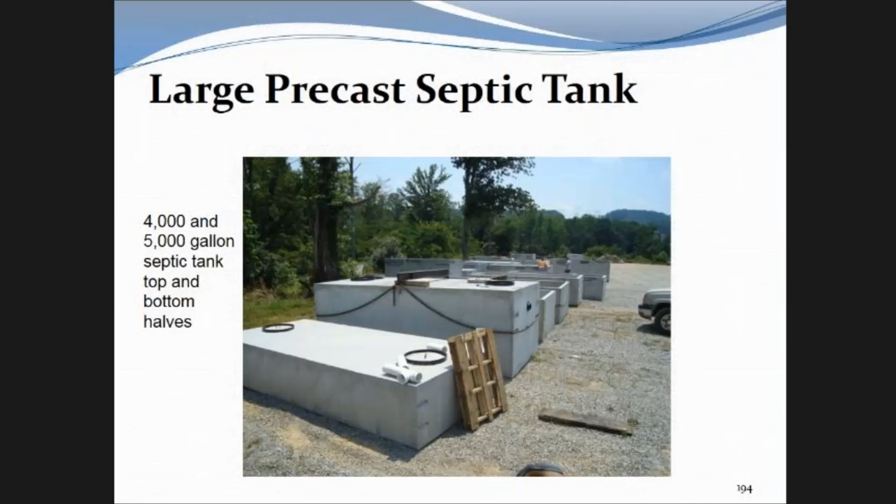So that's one option, some being delivered, some of your larger plastic tanks. These are a few thousand gallon tanks. They are out there on the market, and some of them have been approved for use in Kentucky. Here's a large precast septic tank. This would be another option.

Effluent filters. Again, they help retain the solids. There's the small residential, then the larger commercial.

Of course, they do require maintenance, and you might remind your installers, instead of complaining about filters, it can actually be a good opportunity for them to have extra business, going back and maintaining them with a contract with the homeowner. Instead of always griping, maybe make some lemonade out of that lemon.

It is an upgrade option, of course, for your Group 4 soils, and when you don't maintain the 18-inch separation. It is required for the wetlands, just some of the different ones out on the market. Of course, there's a whole bunch of them out there, and the large ones.

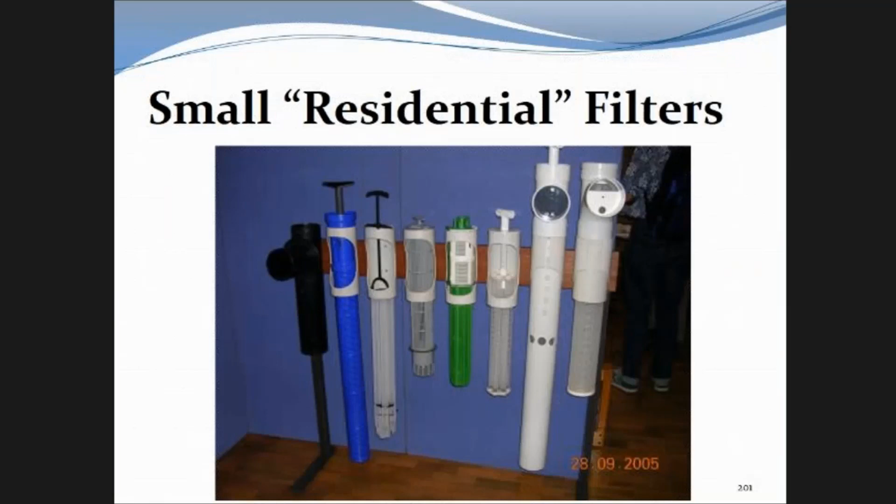How are they supposed to install it? If the tank is new, follow the manufacturer's instructions.

Hey Craig, on those filters, do y'all inspect or approve every single filter that comes across? Say it again? What is the answer, do you all approve each filter, like all those pictures of all those filters? You don't look at each individual filter, do you? They're supposed to submit them for review and approval, yes. She said no, I don't know why. She said she hasn't approved all of them, is what she said.

The question is, of the ones that are supposed to be, in Kentucky, do we approve them? If you ever have a question about any of the filters, just give us a call. Angela is the filter guru, so if you have a question about filters, direct them to Angela. Because there are some out there that are not approved for one reason or another, or they are approved with stipulations.

Are the ones that are approved supposed to have a KY number on them? They're supposed to have a KY number on, but a lot of the manufacturers use molds that they can't actually put the KY numbers on there, but they told us that they're spray painting them or putting the number on there somewhere. That's what they told us. The short answer is the filters are supposed to be reviewed and approved for use in Kentucky.

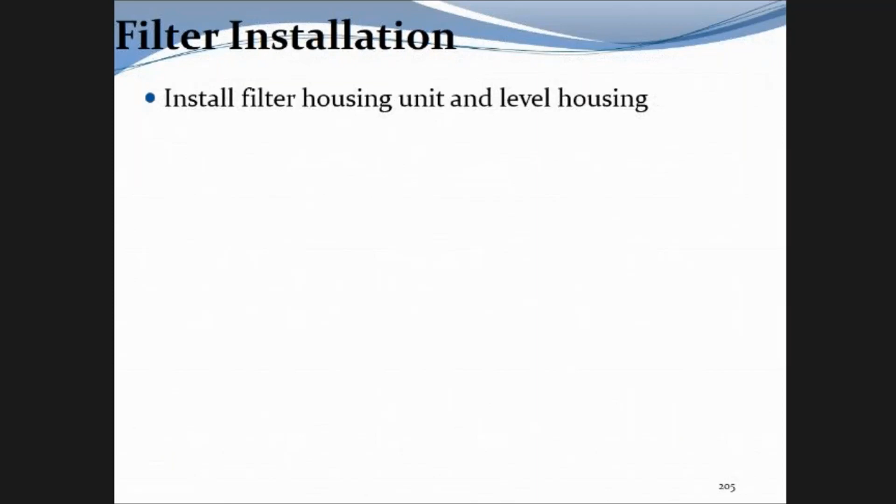Install the filter housing unit and level the housing. Install support legs if needed. On your larger filters, especially if they're using SDR35 pipe, it's a good idea, because those filters weigh a fair amount. They added support legs on that—just solid PVC piping going down to the bottom of the tank to help hold up the filter.

Insert the filter into the housing. Recheck the fit with the concrete lid so the filter handles are not obstructing the tight fit of the lid. You don't want the filter itself to keep the lid from going all the way down on top of the tank. Recheck it, reattach your riser lid on the tank, and you're good to go.

Of course, they have to be maintained. Again, you can remind them it's a good chance to offer an option for maintenance with the homeowner.

Dosing and pump tank options. Here's where we'll talk about your sizing scenario. Do you use a dosing tank or a septic tank? There are tanks made specifically for dosing, and they have the letter D or R at the end of the approval number—D for dosing, R I can't remember what that's restricted for. But a lot of your dosing tanks are just septic tanks retrofitted with a pump.

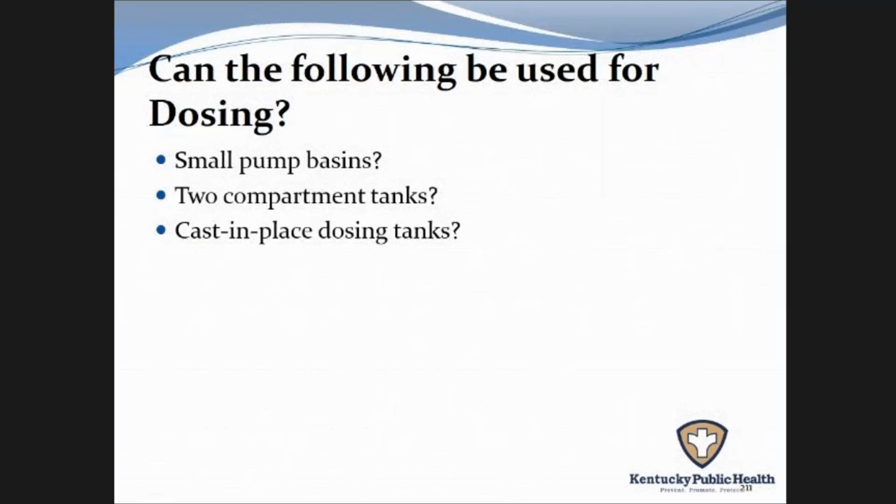Outlet options, several options for the location to exit the dosing tank. You can go through each of these designs and how they work.

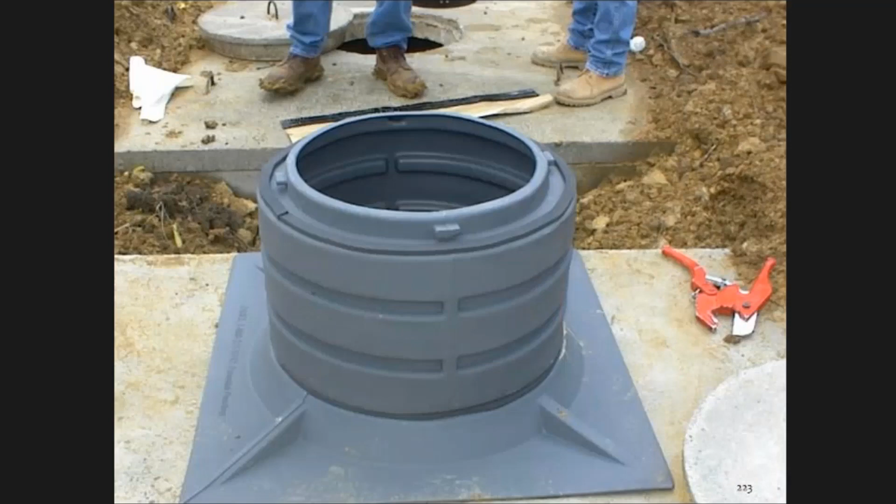Your riser options: you have cast in place, and you have your traditional plastic risers. You can have the add-on riser, and this is not unusual for old tanks where they retro a riser on. You can see the black mastic strip back here, and that goes all around the base there.

Why use a cast-in-place riser? It can be designed for the height needed, can be less expensive. It's pretty easy to ensure the water tightness because there's no seams.

Why use an add-on? Don't do that one. You can have sections added to obtain the required height. It can be added to an already manufactured tank.

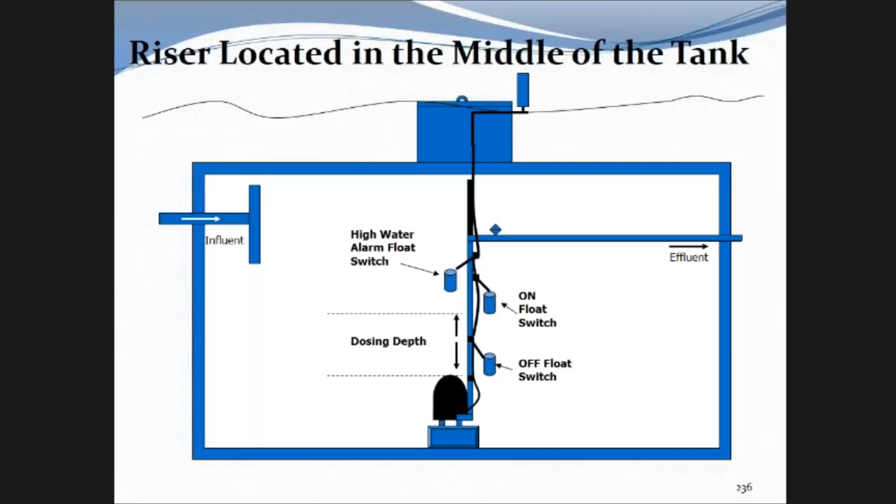Large dosing tank options include using multiple tanks in series. If you need 5,000 gallon dosing capacity but don't have a single 5,000 gallon tank, can you use multiple tanks? Yes, you can use 1,000 gallon tanks or whatever size you can get.

But how do you connect them? When more than one tank is used for dosing, the tanks have to be connected at the top and the bottom. That way, when the pump kicks on, it draws all the tanks down at the same time, not just one. If you're only drawing one tank down, you really only have that one tank's capacity, like 1,000 gallons in that example, while the others just wait to flow into it.

Can you do that with a 2-compartment tank too? No, you wouldn't use a 2-compartment tank for dosing anyway, since you want all compartments to draw down at the same time. But if you knock a hole in the bottom of the divider wall? Well, I don't see why not, but it'd be easier to just buy a single compartment tank, I would think.

Honestly, if you ever encounter a situation where they have to use multiple tanks connected at the top and bottom, the installer needs to work with the manufacturer ahead of time. It's a lot better for the manufacturer to know they need this setup so they can cast a hole in there at the base, so nobody has to knock holes in a concrete tank. That's the same for the divider wall scenario - if they know they need that hole, it's better to have it cast ahead of time instead of knocking a hole.

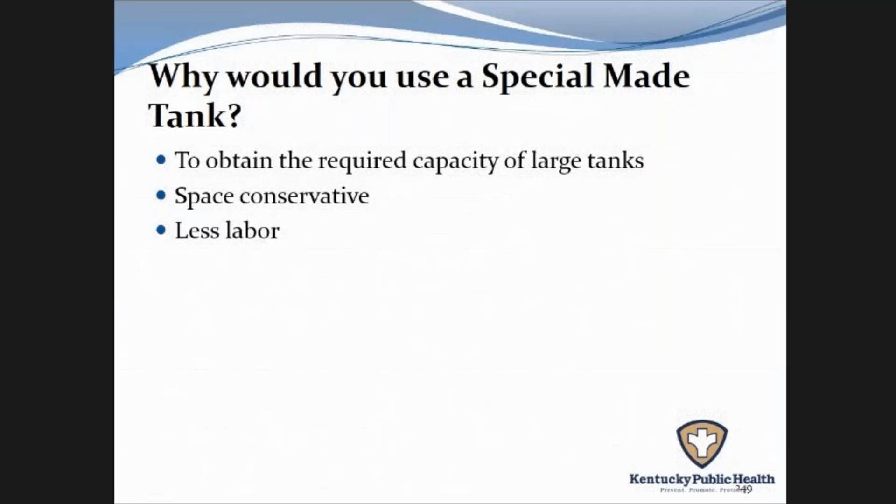Why use special made tanks? To obtain the required capacity. It's more space conservative since you're probably just using one tank, with less labor and possibly less expense. Why not to do it? It might take a little more time, and it's usually approved on site.

Why use a cast in place tank? It's easier to obtain the required capacity and saves on space. It may or may not be less expensive. Why not to? It might take more time for installation because they're building it right there on site, and it has to be approved on site - it could even be turned down for approval after they've poured it if they screw it up.

Okay, let me go back for a minute on the dosing tanks. The question was asked earlier about using a 500-gallon tank for dosing in a typical 3-bedroom home. That's mainly for repairs though, when you're lacking space. Well, it all goes back to the required minimum capacity for a dosing tank. In our example, a 3-bedroom home has a TDW of 330 gallons.

The size of a dosing tank is 2 times the TDW, so your minimum dosing tank would need to be at least 660 gallons.

So if the reg can be met, it has to be met. They would need a minimum 660 gallon dosing tank. If you're talking about a repair where they do not have the room, they can't fit anything else in, then yeah, it's a repair. But in that case, you would need to get a variance. The property owner would need to request a variance for that part of the reg that can't be met. And then y'all would either approve or disapprove the variance at your level and go from there.

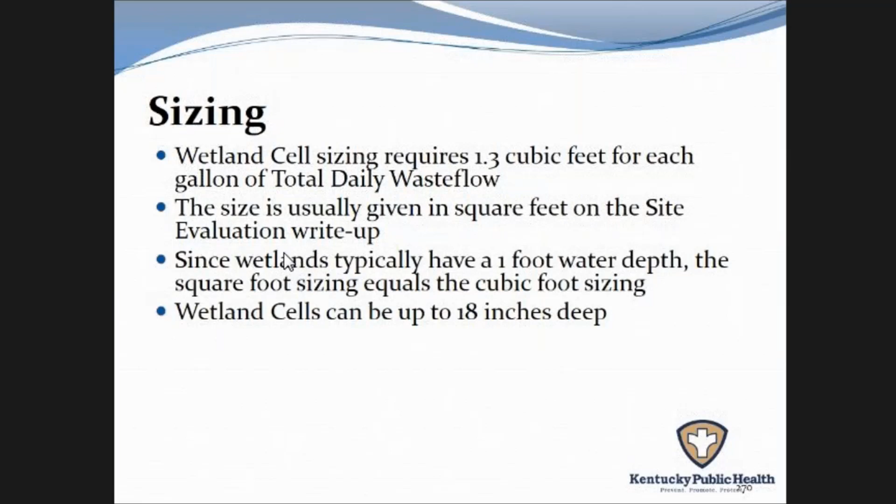It's sized at 1.3 cubic feet times the TDW. It's usually given in square feet, because there's a 1 foot water depth on most designs, so the cubic feet with the 1 foot water depth becomes square feet. Although the wetland cells can be up to 18 inches deep, that would change that calculation.

Here's a sizing example you can go over with your installers so they can follow along with how a wetland cell is sized. It's simply the TDW, 3 times 110, TDW of 330, times the 1.3 cubic feet per gallon. So in that case, a 429 cubic foot wetland cell. Wetland cell sizing is not dependent on the soil type.

If the cell is designed with the 1 foot water depth, then the wetland cell itself is 429 square feet. If it's designed with an 18-inch water depth, then it'd be 429 divided by 1.5, so 286 square feet. Both require the same amount of fill material, just a smaller footprint, although be aware if you do an 18-inch water depth, they do need to use appropriate plants to grow to that depth.

Most plants work best in a 12-inch cell depth. Why the 12? It's the standard or normal way of designing, and it's easier to work with in shallow soil conditions. You might get more evapotranspiration, and more plant species are available for 12-inch depths than for the 18-inch depths.

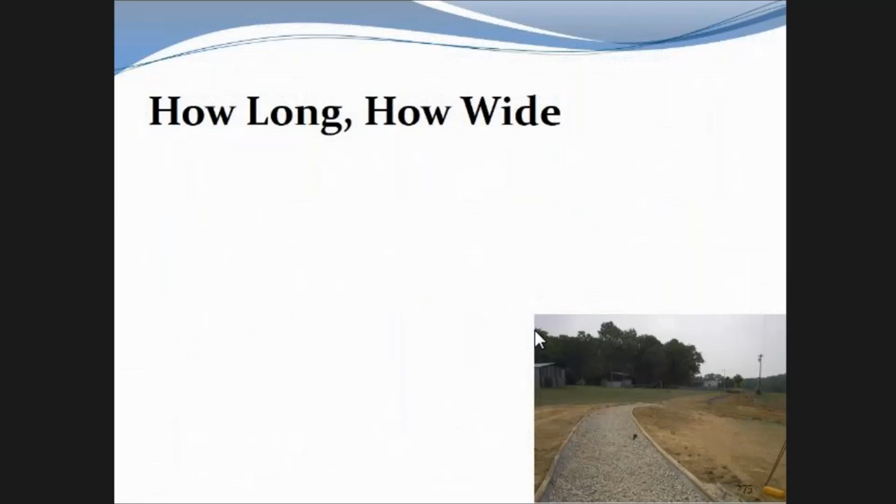How long, how wide? The wetland cell needs to have a 3:1 to 5:1 length to width ratio if it's gravity fed, and that's for a 1-cell system or for each cell in a 2-cell system. If it's using pressure, if the wetland cell is dosed, then it's a different ratio. You generally actually want it more square shaped, so the pressure line spreads out across the width.

Here's an example. If it's a 3-bedroom home, the 1 foot water depth, 429 square foot cell, the minimum length would be 36 feet long. It'd be 12 feet wide for the 3:1 ratio of length to width, up to a 5:1 length to width ratio of 9.5 feet by 47.5 feet.

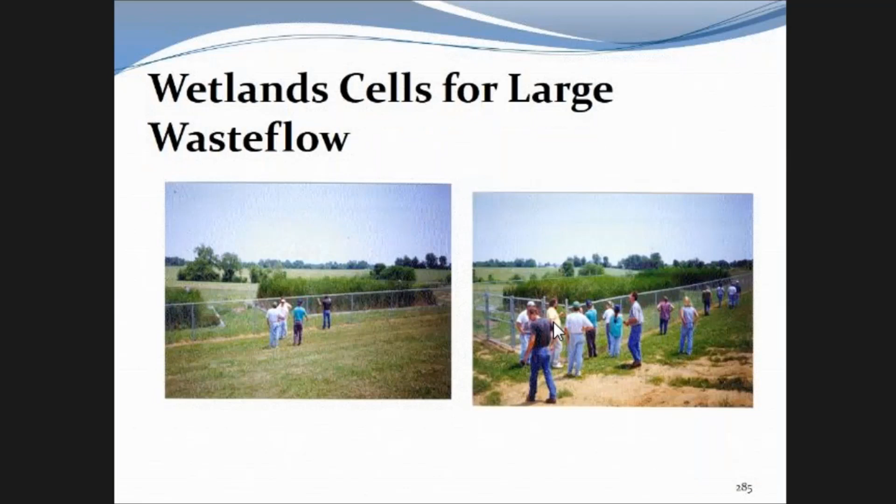Larger systems are more likely to use 2 cells. That's from a school many years ago.

Why use 1 cell? It's more simple to construct, 1 excavation, just 1 liner, fewer overall materials needed. Why use 2 cells? The layout of the area might not allow 1 cell. Large systems are sometimes easier to lay out and install by using 2 cells. Also, if you have a 2nd cell and you're in group 4 soil, then you don't necessarily have to install the liner in that 2nd cell, you can use the group 4 soil that's already on the site. That's only for a 2nd cell, though - the 1st cell would still have to have the liner.

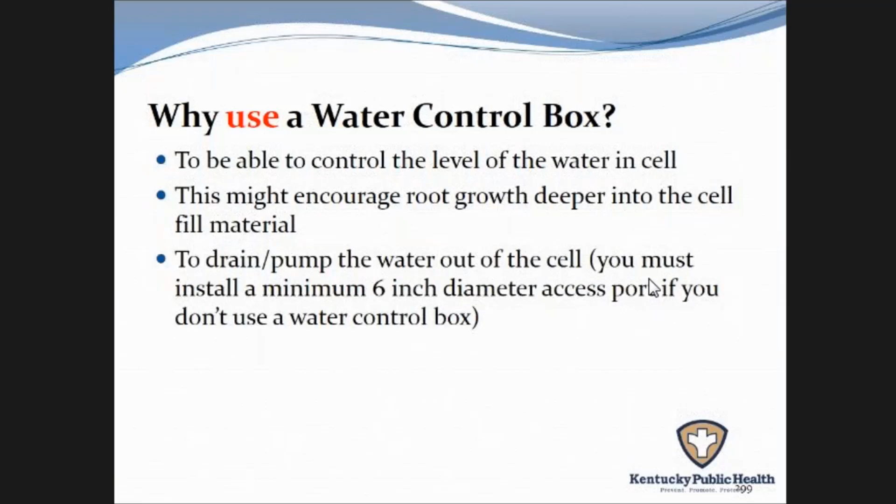So what are your options with the water level control box? Well, you can use them or you don't use them, that's it. It's okay if you don't use them, as long as the wetland cell itself is constructed properly. Why use it? To control the water level in the cell - it might encourage root growth deeper into the cell fill material. By lowering the water level, you can encourage the roots to grow down, then raise it back up once the roots have grown down into the fill material. Or if you needed to drain the water out of the cell, you could lower it and drain it out through that water level control box. There's also a 6-inch access port if the cell needed to be pumped out, if you couldn't drain it out.

Why not use a water level control box? Well, it is extra materials, a little more work time, more expense for those extra materials. It does create an opportunity for tampering from outside, where somebody could mess around with the water level, drop it down, and kill all the plants. It also creates the possibility for leakage since the pipe exits through the bottom part of the liner.

Inlet and outlet header location options: there's a top location, and usually the inlets go in at the bottom of the wetland cell. They drop over the edge of the framework and go into the bottom part, so the dirtiest water is put into the bottom part of the cell rather than up towards the top.

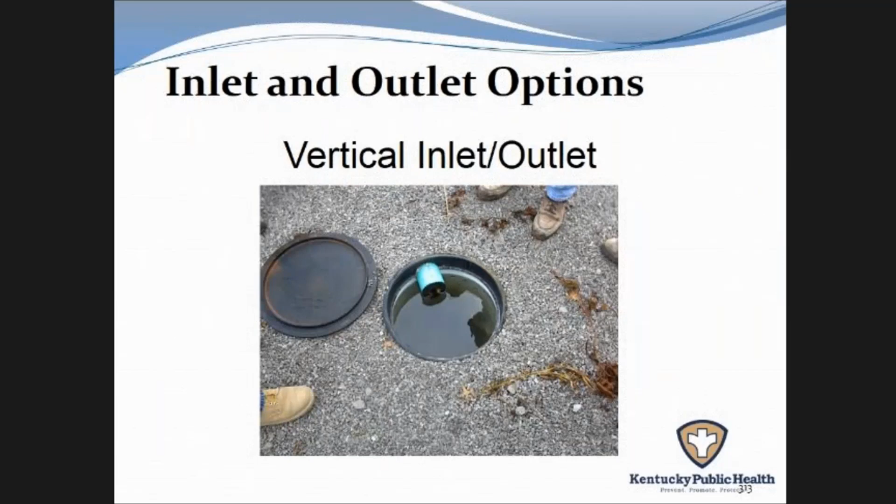Why use a header pipe? It provides for more equal distribution. Why use a vertical inlet and outlet? Well, they are easier to install, and it provides direct access to pump the water out of the cell, so you don't have to have that 6-inch access pipe.

Liner options—there's a lot of different materials out there now. You can go through these with your installers. The rubber industrial roofing material has become very popular because it's thicker, more durable, already UV protected, and very easy to work with. It's also readily available.

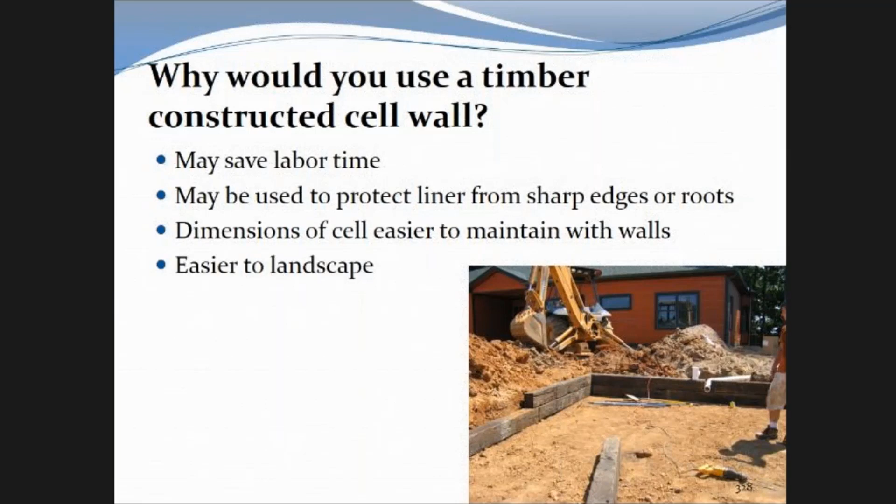Dugout walls versus timber walls. Why use a dugout? There's less material expense, some cell wall materials decay, and possibly less work. Why use a timber wall? It might save labor or time—not sure how—but overall it just makes a cleaner job, and may be used to protect the liner from sharp edges or roots. It's easier to maintain the dimensions, and a lot easier to landscape.

So what are the cell wall material options? Soil and your liner, landscape timbers or railroad ties, cement blocks or decorative blocks. Those are all options for your fill material for the wetland cell itself.

Number 2 crushed limestone, number 4 larger material, furnace slag is considered an option, and river rock—here's a photo showing some of the differences in those materials. Pea gravel is not to be used, it's too small. Some unapproved cell fill materials include tire chips, number 57 rock, number 8 and 9 rock, and unscreened creek rock.

Cell cover material options: above the water level, above the cell fill material, there needs to be cover material. This is where number 57s could possibly be used, above the water level. Pea gravel can be used, or decorative stone. This shows how the cell cover material would be placed—this is the cell fill material where the water flow is, anywhere from 12 to 18 inches. That's the water flow, and above that is at least 2 inches of cell cover material, above the water level, so it should be dry cap rock basically.

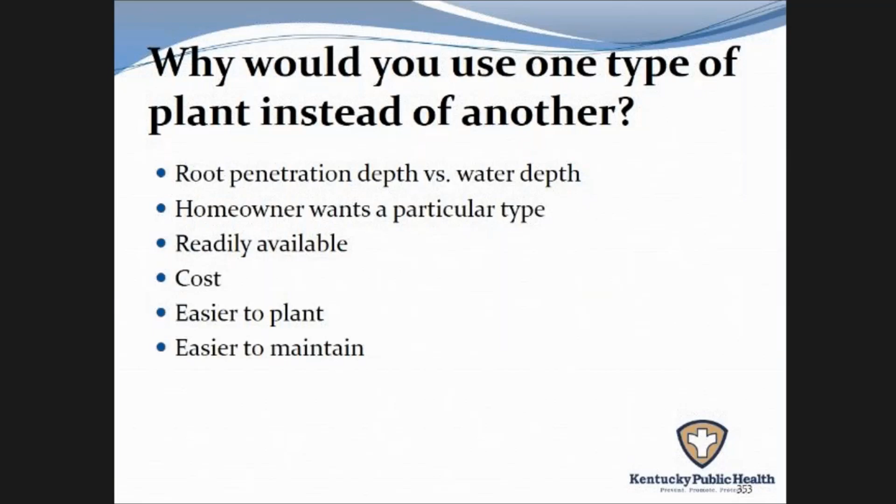Why one plant instead of another? Well, root penetration depth matters versus the design of the wetland cell and water depth. The homeowners might want a particular type - they might not want cattails out in their yard, they might want something that looks nicer. The availability of the plants, the cost, the ease of planting, ease of maintenance - all these factor into the type of plant they might choose.

Just a few photos showing how wetland cells can be done. Probably not quite enough plants there. The wetland cell overflow lateral field is 50% of a full-size lateral field, and therefore it can be a very space-efficient system option.

Okay. Trench barrier material - this is the material the installer has to put above the rock in a rock system and above a curtain drain, the rock in the curtain drain, so they're aware of what's required.

Just showing a photo. Notice the system on the right might be a wee bit deep in there.

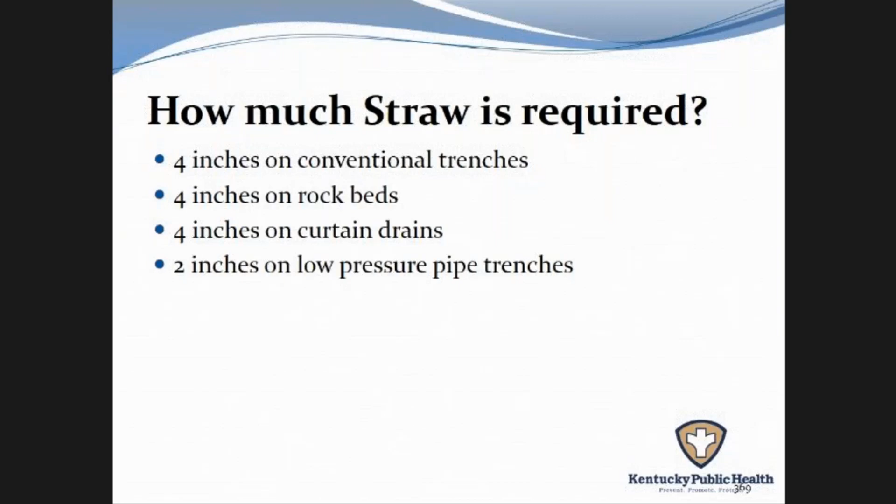When's it required? Above your conventional rock trenches, rock beds, and curtain drains, and low pressure pipe trenches also when they use rock. How much? 4 inches on conventional trenches, rock beds, curtain drains; 2 inches on low pressure pipe trenches. How much filter fabric? A single layer with complete coverage from side to side and end to end.

If you need to, your installers can take a break, or you can drive on. Keep things in perspective.

Some of your distribution options you can discuss with your installers. First and foremost, you need to stress to them they need to use distribution boxes on gravity flow systems.

The types: equal flow distribution, level box - basically an equal flow box with no baffle. Thank you, it's right after lunch. Your hillside boxes and low pressure lines, pressure. So equal flow distribution.

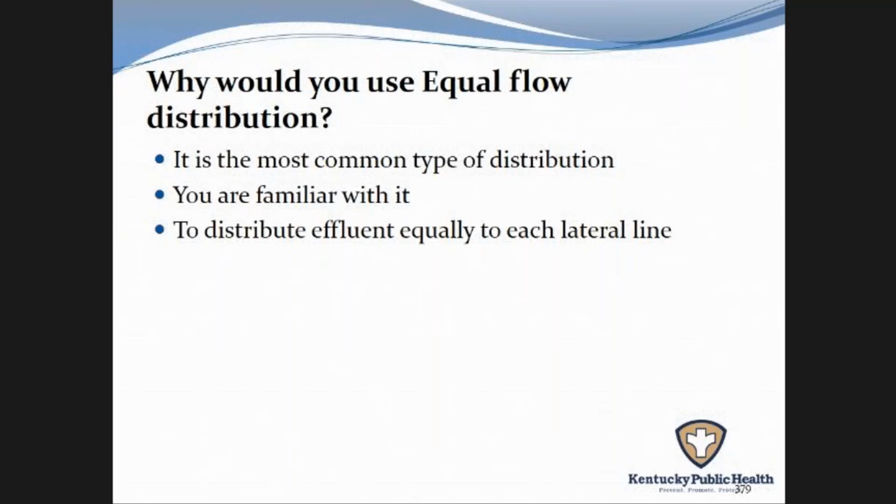Why use equal flow? It's very common, easy to find. Most installers are familiar with it. Very easy to set it up to distribute the effluent equally to each line. Why would you not use equal flow distribution? Well, if you're not able to install equal length lines on the layout of the lot, or if a holding tank has to be used at the end of the lateral field, sometimes it's a little easier to design it using hillside boxes. It can be done with equal flow, but it's easier with hillside. You need to pump or use low pressure distribution.

Level distribution is for very level lots only. Why use level? You're on a lot with a slope of 1% or less, going into one bed, or if equal flow boxes aren't available and you're on a very level lot. Why not use it? You're on a lot with slope more than 1%, and a few other items.

Hillside boxes. Why use them? If you can't get equal length lines, if you have a holding tank at the end, it's easier to run it off that last hillside box. If you're on a steep site, and sometimes it might be easier to repair.

Why not to use them? If you can get equal length lines, they might want to go ahead and use equal flow, if they're wanting equal distribution to each line. And definitely if you're on a group 4 site, then remind them that hillside is not an option.

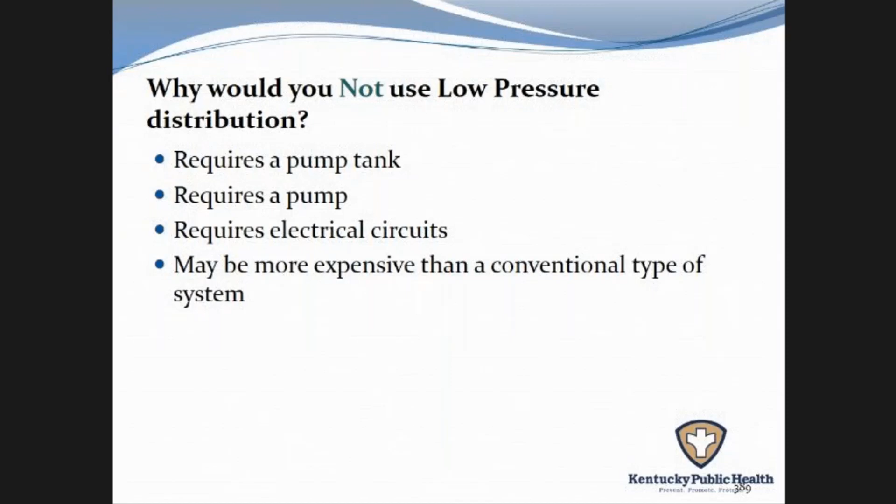Abbreviation for Advanced Treatment Unit, ATU. What contains kitchen sink, dishwasher, and toilet discharge? That's your black water.

And now you can congratulate them on a great job.

Some of the lateral field options you can discuss with them. Always remember, if one option won't fit a site, there might be several others to look at with them. If they have difficult sites due to slope, available space, or configuration, different rows or beds might be worth trying.

You can go over the rock options. Again, in your area, you can talk about some different issues that you might have with the type of rock that's available, the rock systems that they've been putting in, as far as the uniformity of rock, and how it's supposed to be clean.

Some of the different rock choices. Talk to them about their conventional trenches, how the layout can work with different lots. Remind them about the sod being removed or turned under before adding cover soil.

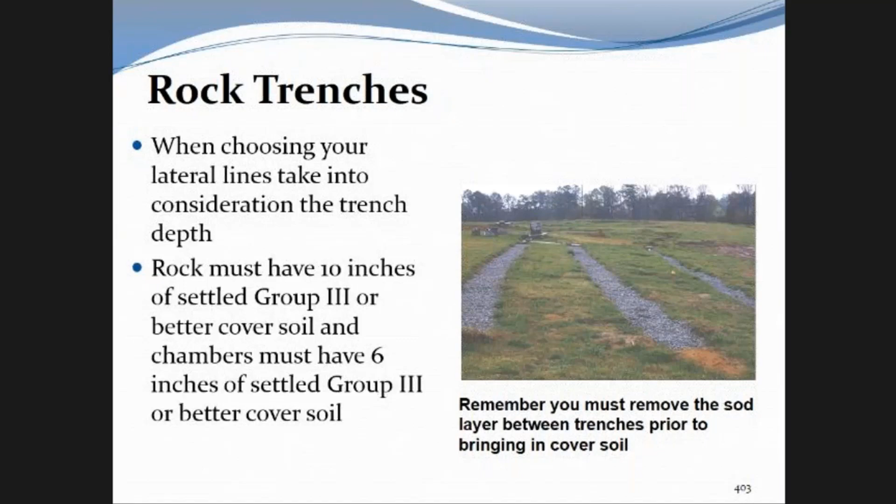Rock beds: anything that's 3 foot wide through 12 foot wide is considered a bed.

Long rock beds weren't the best choice for that particular site because of the contour - you can see how much deeper it got. That fill's almost butt deep in that system. So shorter beds might have been a better way to get that system to go in right.

Follow contour, stay at the right depth. Long beds can be used if your lot allows for them. Some shorter beds oftentimes have to be used just to get it to fit properly in the area allowed.

Here's an example where six 30-foot long, 6-foot wide beds were used, just to fit into this small area. And this example where a little bit longer beds were used.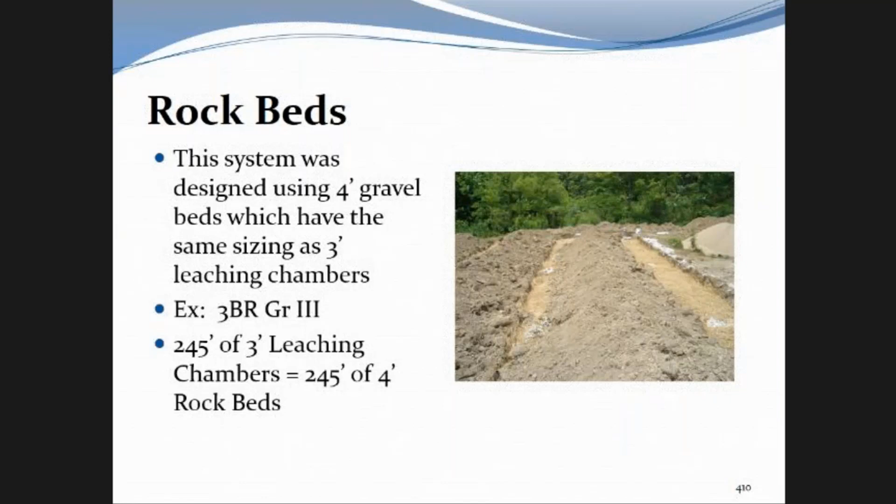4-foot gravel beds have the same sizing as 3-foot leaching chambers. Go through a sizing example with them. Group 3 soil needed 245 feet of either the 3-foot chambers or the 4-foot rock. Go through your rock choices.

There's just talking about how a layout would be very straightforward for that particular lot versus a different lot. And again, a good chance to talk to your installers about different layouts that have been used in your area, and different requirements that were needed.

Chambers. Chambers can help overcome different site requirements or challenges. A lot of people just like using chambers more nowadays. They can be a space-saving system, and there's a lot of options out there now.

There's the 1-foot wide standard, 2-foot wide standard, 3-foot wide, and then the chamber beds of your standard chambers. And also there's now the shorter 8-inch tall chambers that are available in all of those above options, including Shorty chamber beds, which are now available to use.

So you can talk to your installers about the sizing of your chambers. A 1-foot conventional chamber is the same as a 2-foot wide conventional gravel as far as linear footage - gives a sizing example. Same with the 2-foot, gives an example. It only needs 70% of 2-foot rock.

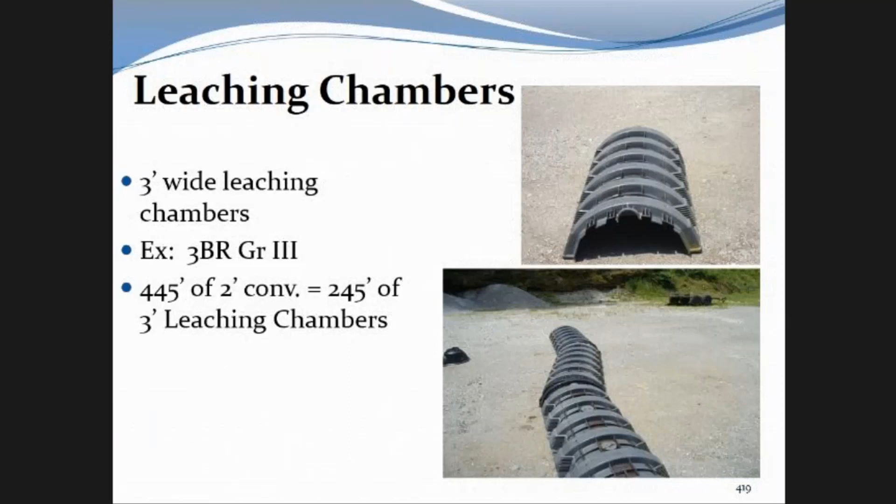And the 3-foot, which most people are familiar with, only needs 55% of your 2-foot rock. That's the standard height chamber. Chamber beds: 6 foot, 9 foot, 12 foot wide chamber beds - they can help save space.

Combinations. If you have a difficult site, you can't just get anything to fit. Think about using a combination system with single rows and beds. Some sites might hold long single rows and short beds.

Here's a situation where they used a combination. They had a 6 foot chamber bed in one area, and a 3 foot chamber trench in another area. They didn't have enough area to fit all of just one type of lateral line, so they combined it. It's a little bit more of a challenge to size, because there's more work involved to design it.

So you can go through this. Now, before you present this, I would recommend you go through it yourself to make sure you understand how these numbers work. It's not real difficult. You can help them go through how they figure up a combination system.

Here's one example: a 3-bedroom home. They lay out a system for 6 foot wide beds in group 3 soil, and go through the sizing for those 6 foot wide beds. They need 178 feet of 6 foot wide beds. They lay out the system, but they can only get 146 feet of 6 foot wide beds. So they still have 32 feet of 6 foot bed to make up.

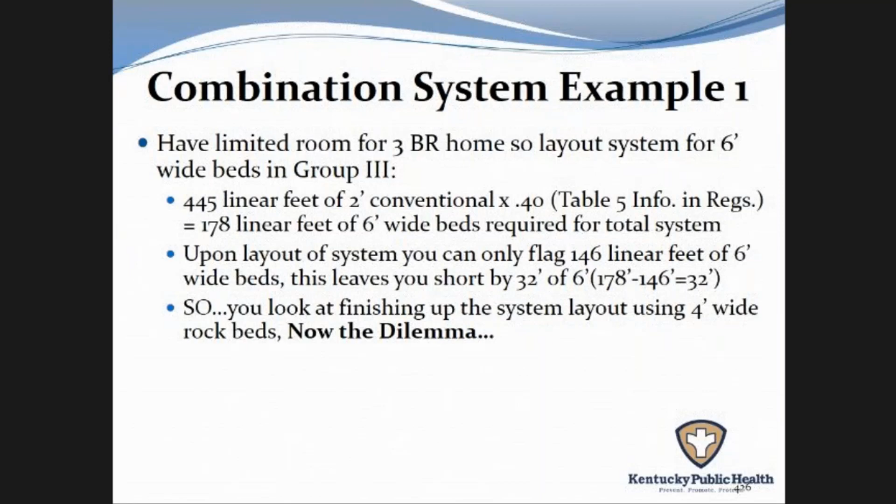So they look at finishing up the system using 4 foot wide rock beds for that extra footage they need. So how much 4 foot wide rock lateral do you need to finish that last 32 feet? This is how you do it.

They need that third bullet - another 32 feet of 6 foot to meet the requirement, and they want to convert that to 4 foot wide instead of the 6 foot wide. So they convert the 32 feet of 6 foot back into the 2 foot conventional. You're just working backwards in how you sized it.

So the 32 feet divided by 0.40, which is the 6 foot rock bed sizing factor, gives them 80 feet of 2 foot rock. Now take the 80 feet of 2 foot rock and convert that to 4 foot rock by going back to the same table: 80 times 0.55. They would need 44 feet of 4 foot rock bed. So basically that 44 feet of 4 foot rock bed is equivalent to 32 feet of 6 foot wide rock bed.

And that's how it might look for the system. Now this is a hillside distribution, so they got the total footage that way. They didn't have to be the same length since it was hillside, but this is equivalent to what was needed for the 6 foot wide.

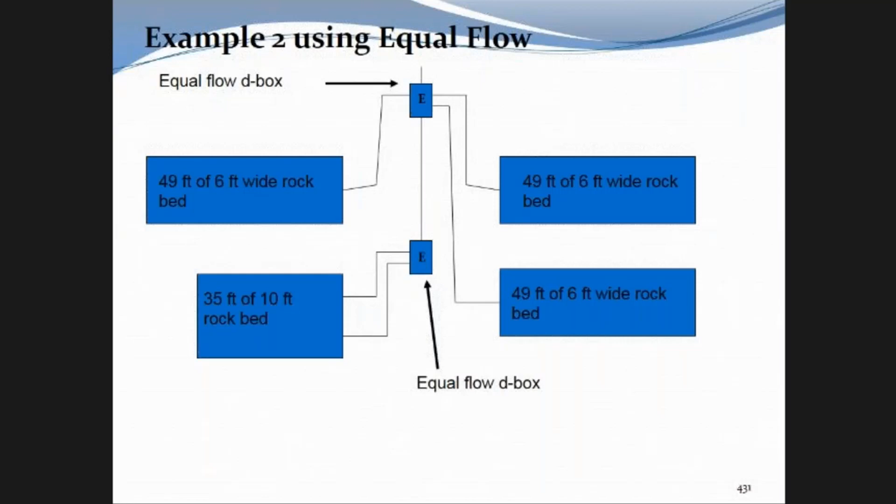Is there a reason that they're using 2 boxes? Since this has to go in, because they're trying to feed each box, each line of chambers, they could just run one line and put a header right here. I was going to say, because the other one was the 6 foot and it had 2, but the 10 foot had 2 lines. Well, the 6, on the other one, had only 1 line. Right, well, so I just - by reason.

For the wider rock beds, they have to have at least 2 perforated lines going down through the rock. Was that rock bed earlier? Yeah, the earlier ones were rock, and that's why it had 2 lines. I was ready to get to this.

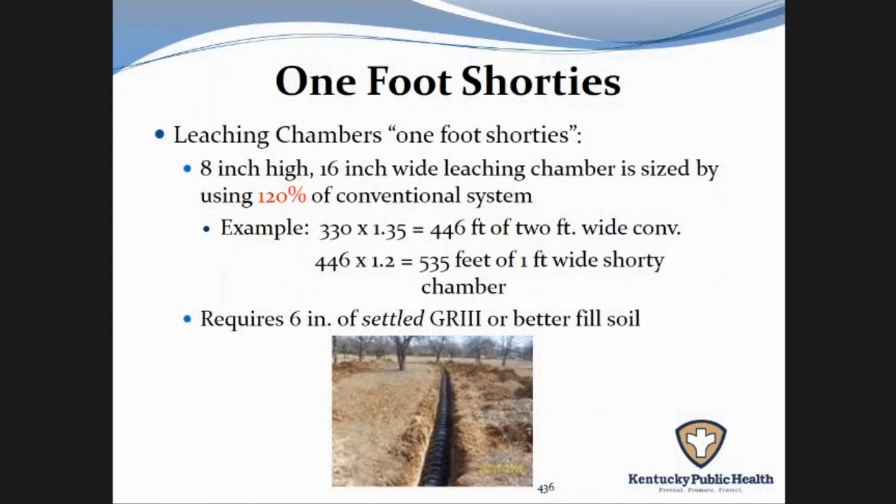2-foot shorties need 91% of your 2-foot rock. So in an example, you're going to multiply your 2-foot rock footage by 0.91 to get your 2-foot shorty chamber footage.

3-foot shorties, your multiplier is 65% of your 2-foot rock, so your multiplier is 0.65. Your 2-foot rock footage times 0.65 gives you your footage of 3-foot wide shorties.

And then just showing a couple layouts, there's a 3-foot wide shorty system. These can be helpful on shallow systems. If you want to put in less cover soil, it saves you 4 inches of cover soil amount since they're only 8-inch tall chambers instead of 12-inch tall. But it does take up a little more footprint space since there's a little more footage.

Shorty chambers can be used in beds. They're sized the exact same as a rock bed of the same bed width. So whatever your footage is for a rock bed, you could use the same footage and do it in shorty chambers.

Some of the different options for your leaching chambers, you can talk to them about the different angles and swivels, which helps some of the layout of lines, just to get them to follow contour easier. I know in years past, some installers would complain it's hard to get chambers to follow contours. There are pieces and parts out there to help them meet that challenge.

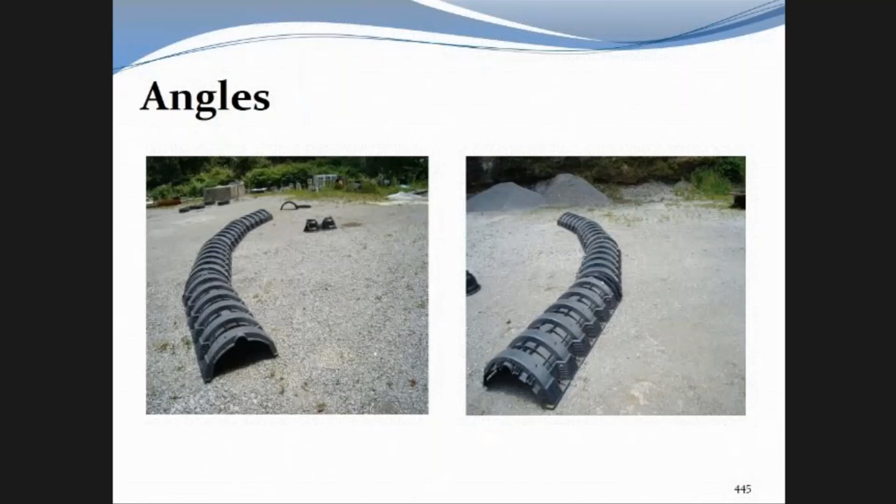You see how that line is kind of snaking along because they've used the angles in there, bending the row using the angles. It is possible for them to follow the contours. And showing it in practical use out in the field, same with swivels, how they can follow the contour.

The end caps, there's a variety of end caps out there. On the inlet end caps, they should always be putting the inlet pipe in the top hole, not into the bottom hole on the inlet end of your chambers. Remind them of that.

You might remind them that end caps in Kentucky are not approved to be used as a distribution device. They still have to use an actual distribution box before the lines chambers.

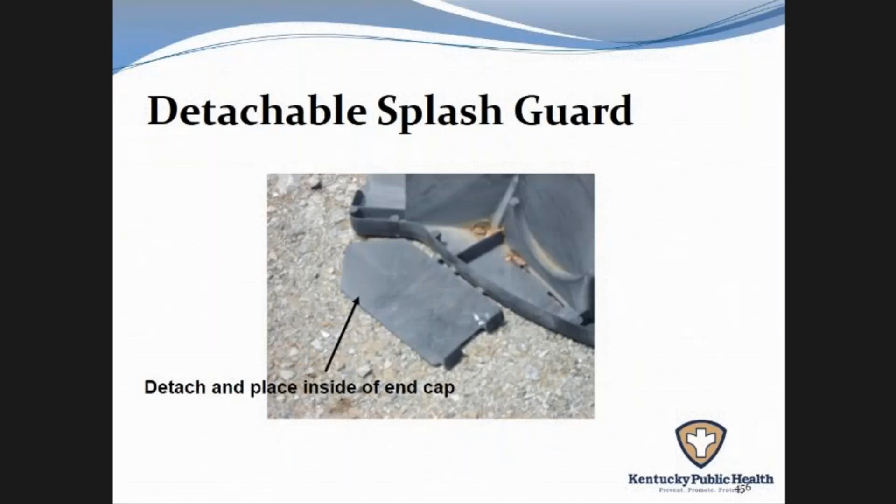Showing a splash guard detached. Some of them have the splash guard built into the end cap itself. Talk to them about the splash guards, just trying to help keep the effluent from rutting out an area when it spills into the end of the chamber.

Some of the alternative aggregates that have come on the market, EZflow is one of the types. It's still considered an experimental system for your lateral lines. There's requirements as an experimental system.

However, the EZflow, which is the pipe that looks like it has packing peanuts around the perforated line, is approved - it's not experimental - if it's going to be used in a curtain drain. They can use EZflow drainage pipe for curtain drains, and it's approved for that. There's a photo of it. That's the EZflow in a lateral line or bed.

Another example, I call it packing peanuts, it's packed around the perforated line. There it's being put in, but it's put in a little too deep. Talks about how it's going to be installed in that scenario.

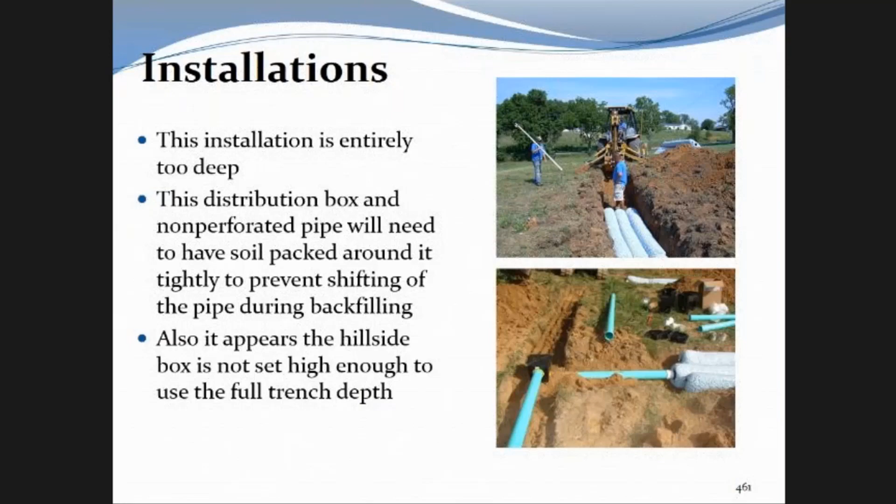Lateral field modifications, curtain drains. I know a lot of your installers don't like to deal with curtain drains. I've never understood why - if the site requires it, to me it's just a little more work for them, but they're going to charge the homeowner anyway.

Talk to them about how it's installed, how it's laid out, the different configurations that the curtain drains might have, depending on the lay of the land and the lateral line layout. Might be in a horseshoe, might be on two sides.

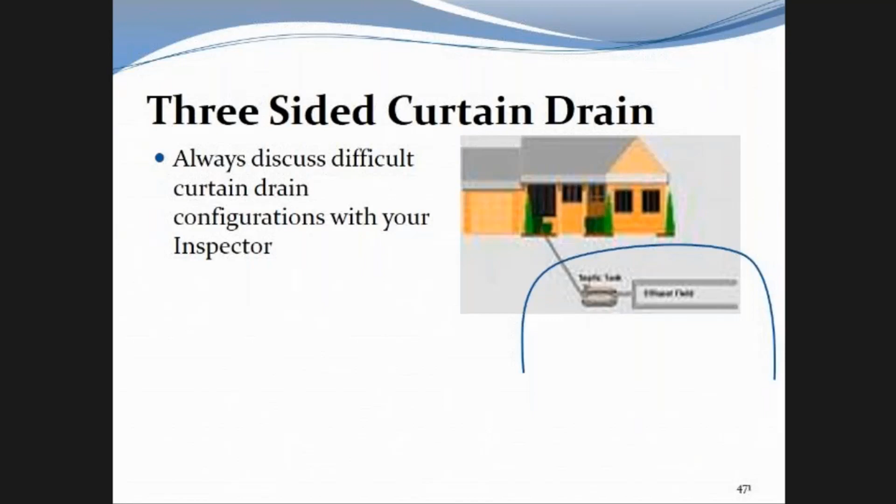Has to come out to daylight. If they're not sure how to configure it, they need to touch base with you about the curtain drain. Sometimes it needs to go completely around the system. Usually on real level lots, it might be that way.

Talks about pipe with holes. It's for distribution. The large rolls of slotted pipe can be used for curtain drains, even though it's not used for lateral lines.

Have to be filled. They're supposed to put 2 inches of rock in the bottom of the curtain drain, then put in the piping, then bring the rock up to within 4 inches of the surface. For curtain drains that are less than 12 inches wide, they have to use pea gravel.

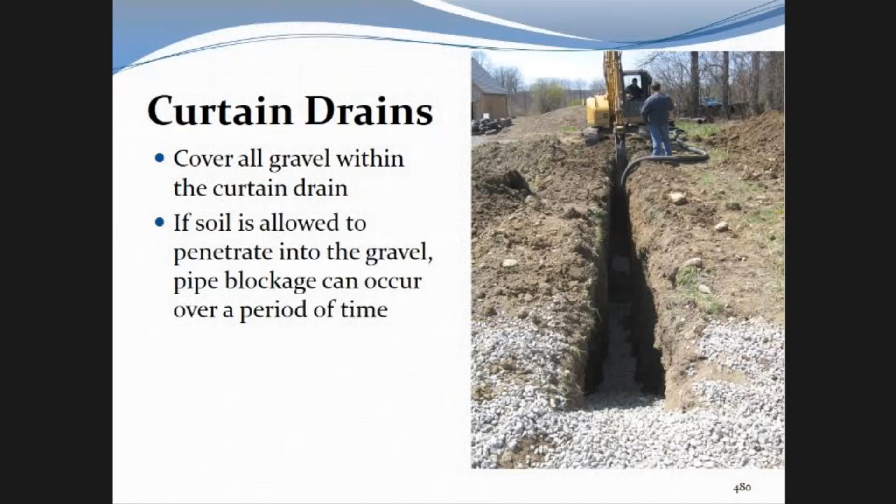Cover all the gravel within the curtain drain. Don't forget the barrier material. No plastic required. Hopefully this isn't still talked about out there much, but I know many years ago some people were under the impression that a curtain drain had to have plastic on the downslope side wall of the curtain drain. Just remind them, no plastic in the curtain drain.

Barrier material, we've already talked about. They can use filter fabric, they can use straw. Just make sure they use the right kind of straw.

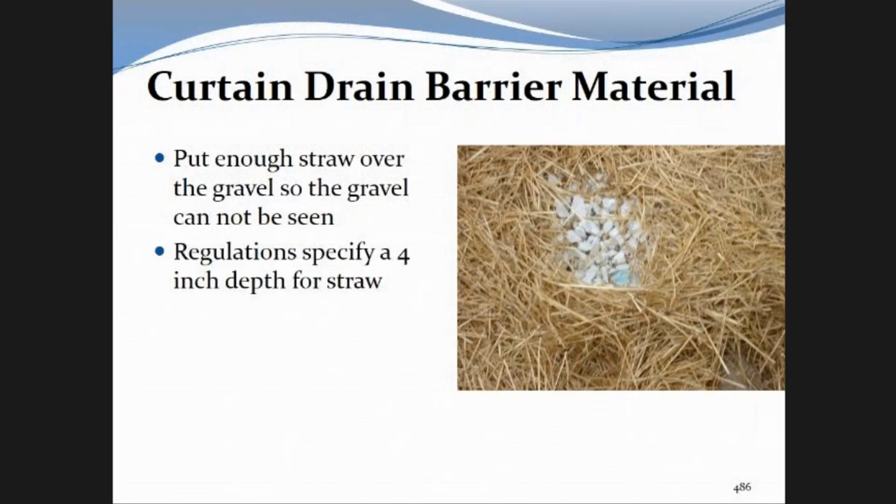Need to have enough straw over the gravel so the gravel can't be seen, a good thick layer. If you can see any gravel, let them know that they don't have enough straw. Regulations say 4 inches, good handful thickness of straw.

When they go to bring it to daylight, once they get past the last lateral line, they don't have to keep using the rock and perforated or slotted line. They can take it to solid pipe and just take it on out to daylight. Don't put floor drains into your curtain drains. Some people dump different things in the floor drains.

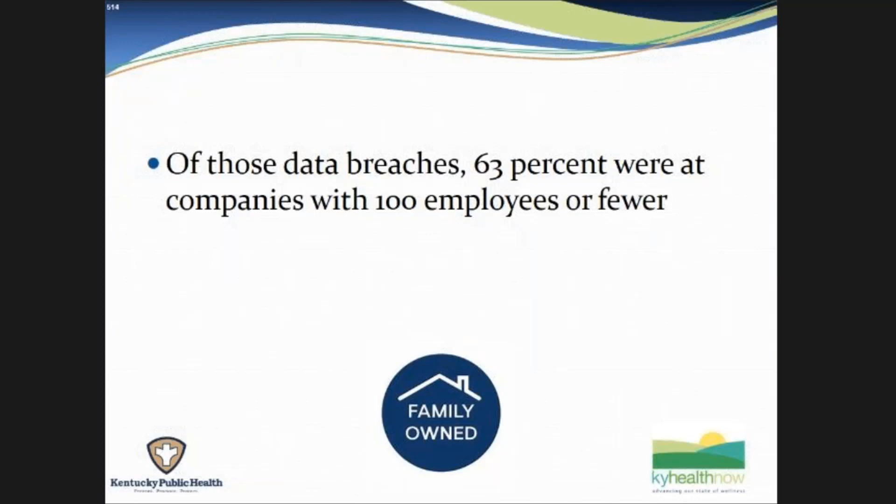Then there's a little stat about the Secret Service and Verizon: 63% were companies with 100 employees or fewer. Once again, we're just trying to drive home the point that these guys are pretty ripe targets. 95% of credit card data breaches were on small business customers.

Here's some tips for what they can do to improve their business to avoid this happening to them. Assess risk and identify weaknesses.

Create a contingency plan. Now, this stuff doesn't have to be really boring with them if they'll ask questions. But if you're in a room where you're getting blank stares, ask one of them: what would be, if you were to do this, your contingency plan? And then that might spark a little, well, what is a contingency plan? And then you can go into it. You can do that on almost every topic in this presentation.

They need to educate their employees, which usually these are family-run businesses, so that's not a big stretch. These guys can get their family members up to speed pretty quick. If I would guess, I would say probably 95% of these guys, their wives run the business.

All right, how they need to hold the employees accountable to their security policies and explain to them why they've got to use strong passwords, not password 1234 and stuff like that.

Back up critical information. That's really important for these guys. It doesn't have to be a cyber attack. They can screw something up, or their computer or system could fail and erase all their data. If they don't have it backed up, they've just wasted a couple years of getting modernized for nothing, and they're going to go right back to paper files instantly.